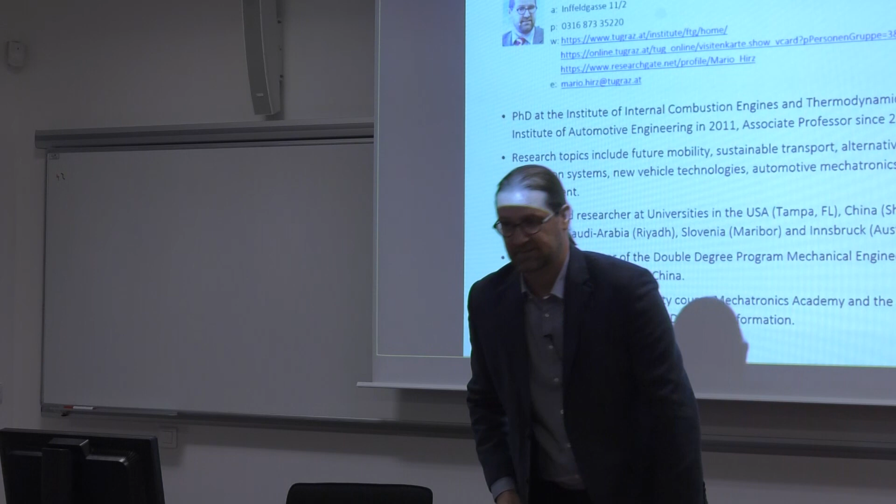So I'm Associate Professor at the Institute of Automotive Engineering at Graz University of Technology. I have a PhD in combustion engines, so I'm a mechanical engineer, and I come from the combustion engine side. After my PhD, I was asked to build up a new department, which we called automotive mechatronics, so it's electronics and electrics in cars. A large share of my research is related to electric mobility, electric drives, and I will come to that in more detail this evening.

Besides my job at the home university, Graz University of Technology, I'm a professor at Tongji University in Shanghai. We have a close cooperation with Tongji in Shanghai, and we also have a student exchange program. I worked for some time in the United States, in Tampa, at the university. This winter I'm in Thailand, in Bangkok, where we do a winter school. It's much warmer than here - in January we have 30 degrees in Thailand, so it's not a bad idea to make a winter school there. I'm well-networked internationally, because automotive industry and automotive research are also worldwide networked.

A few words about my university. I don't need to say much about Graz - Graz is in the south of Austria. We have about 300,000 people, a little less, so it's smaller than Brno. With the agglomeration, we have about 500,000. What's interesting in Graz is that we have 4 universities and about 55,000 to 60,000 students, so it's a very young, dynamic city. One of these 4 universities is my university, the Graz University of Technology.

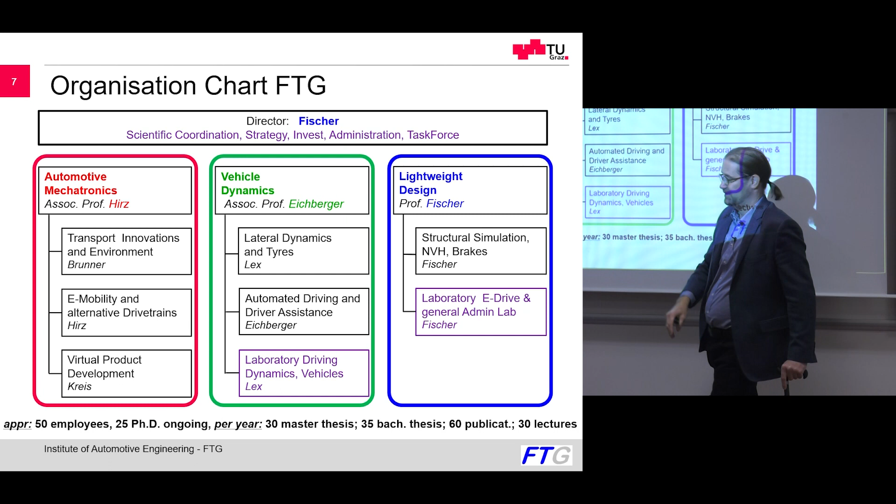The second department, led by my colleague Professor Eichberger, is related to vehicle dynamics, and he has two research groups: one led by my colleague Cornelia Lex about tire research, and Arno Eichberger, who is focused on driver assistance systems and automated driving.

In my group, I also work in the area of automated driving, but the difference is he considers humans in the car as drivers, and I work on robots. So the cars we develop in my group don't have a steering wheel or pedals anymore. Arno Eichberger is doing a lot of research in the interaction of humans and machines.

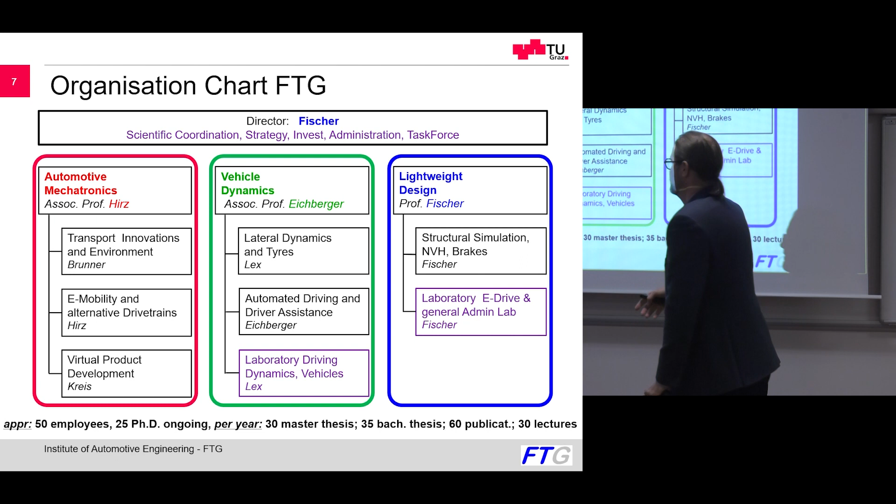Finally, my group is the largest group in the institute at this time. We have three research focuses, and I will introduce that in the next slide: transport innovation and environment, electric mobility, and virtual product development. For each of these groups I have one slide prepared to show you what we are working on.

Lectures and teaching - I think I don't have to talk a lot about this here in the university. We have basic lectures in automotive engineering, and specialization lectures. For example, I have a lecture on automotive mechatronics, innovative powertrains, commercial vehicle technology, measurement techniques, and so on. These are the specialization lectures in the area of automotive technology, plus laboratories and collaborative lectures, as is usual in the university.

Here I would like to start now with examples, and I want to show you what we are working on.

I just have a question - do you see something here behind the cameraman? Is this okay for you? Because I stand here to show you the screen, and if you don't see, just move, we have space enough here. Okay, or you sleep very well behind the cameraman.

This is another opportunity. Okay, the first group, transport, innovation, and environment, is related to technologies of the future. Here we think about technologies in 5 years, 10 years, or beyond. Students love this group because it's very innovative and creative.

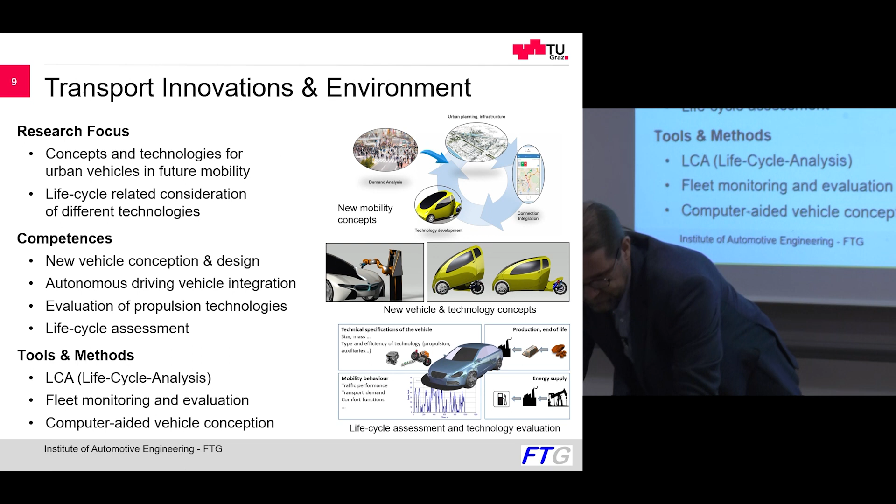We have shown it last year in Munich at the automotive fair, IAA, in a use case. I have prepared some videos just to show you what we are doing here. Give me a second, I'll change the screen.

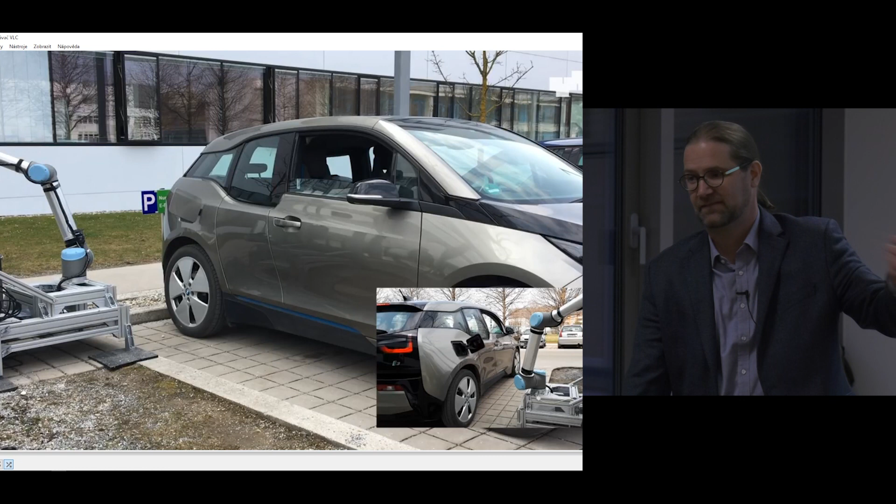So this was the first stage. Here you just see our robot and the car parking in. This car was not autonomously parking - we used a student for that because we did not get an autonomously parking car from BMW. Then the robotic system identifies the car with video-based object recognition, identifies the position of the charging lid, and then plugs in.

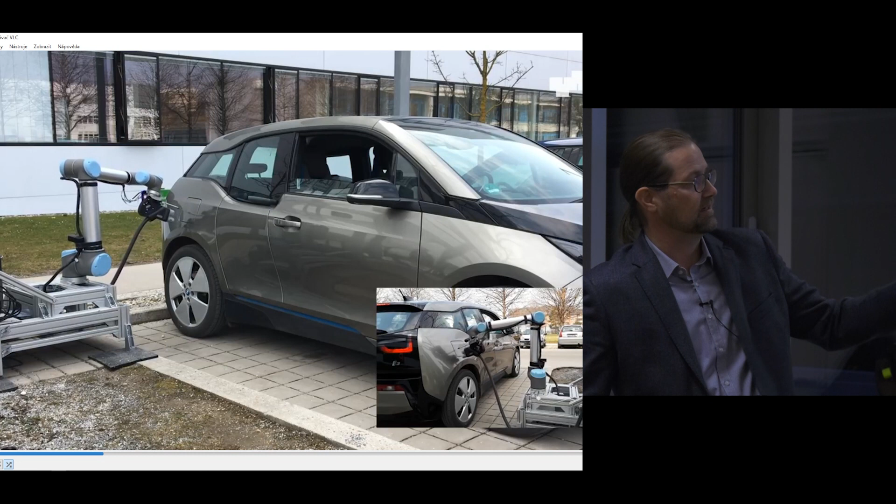This is a highly precise process because these standard plugs are not built for robotic manipulation. We do it by hand, and as a human doing it by hand, we can manage it somehow, but with the robot we must be very exact when placing that - it's about a tenth of a millimeter. This was one of the tasks one of my PhD students worked on. After charging is finished, it unplugs, closes the lid, and the car can exit the parking space. As I said, this was shown last year at a fair in Munich as a larger development step.

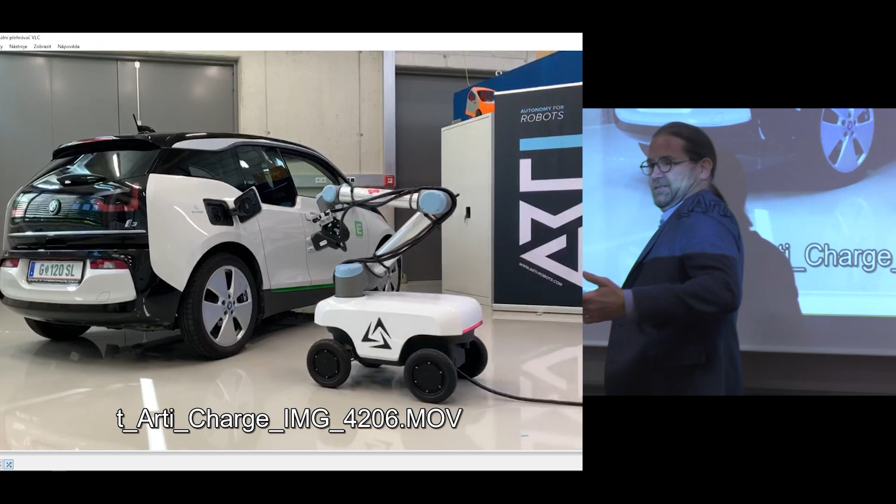Another project related to this: a robot that drives to the car where the car does not need to go to the robot. So the robot drives to the car, plugs in, and charges it.

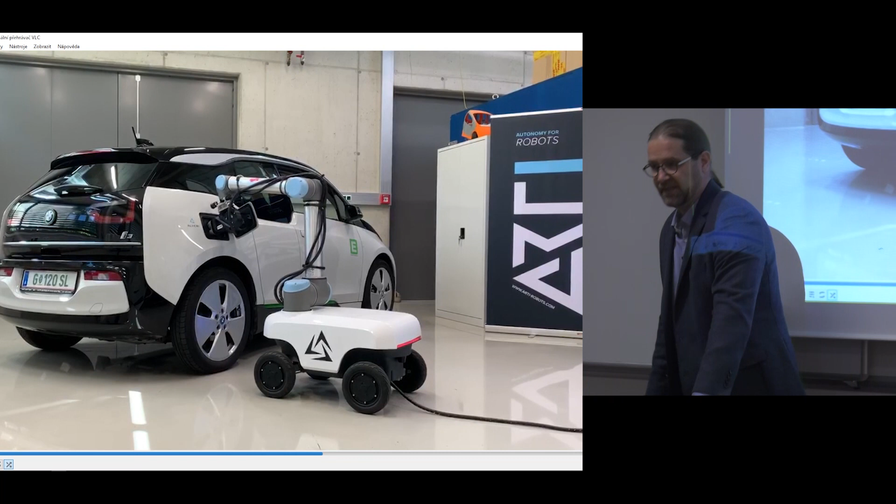This is just an early prototype because the challenge is how to bring the electricity to the robot. Here we did it with a cable, a small cable, so it was not high power charging. If you have a heavy cable, this is of course much more tricky.

On the next step, not shown on this video, we realized the robot takes a plug that is in a wall box at a parking place, plugs in, then drives to the next car and takes the plug. The challenge here is that you need space. When the cars park very tight, the robot cannot really go in. So I'm not so convinced it will really succeed, though it's a nice exercise.

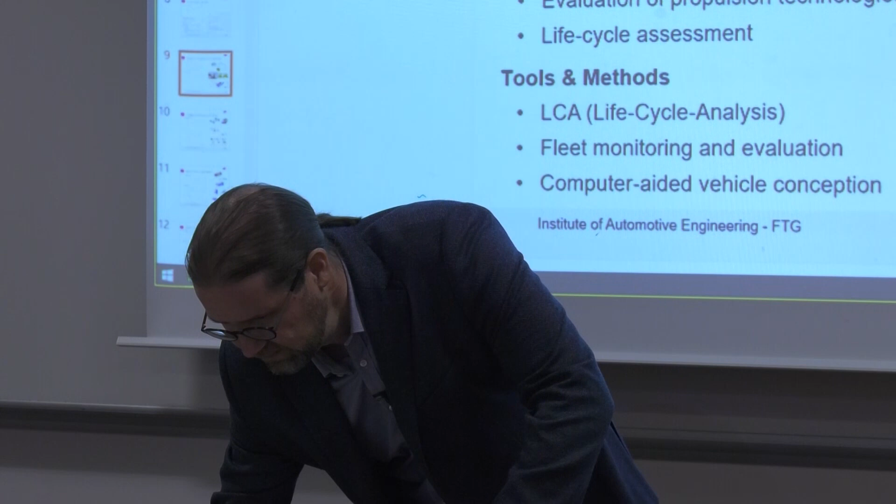My next research group is e-mobility and alternative drivetrains. Here we develop operating strategies for hybrid cars, for energy optimization. We had a project with BMW, for example.

Another large area where we have two PhD students working is the optimization of electric drive axles. These consist of an electric motor, inverter, and a gearbox that is typically not shiftable—most cars have not shiftable gearboxes. This drive axle should be optimized in terms of performance, efficiency, space requirements so it fits into the car, and of course costs. Cost is a big issue here.

We developed, together with a large international supplier, Magna—perhaps you have heard of Magna Powertrain—a new generation of drive axles, and I also have a video. It's a little bit of an advertising video, so I'll skip the beginning, but just to show you what we are doing here.

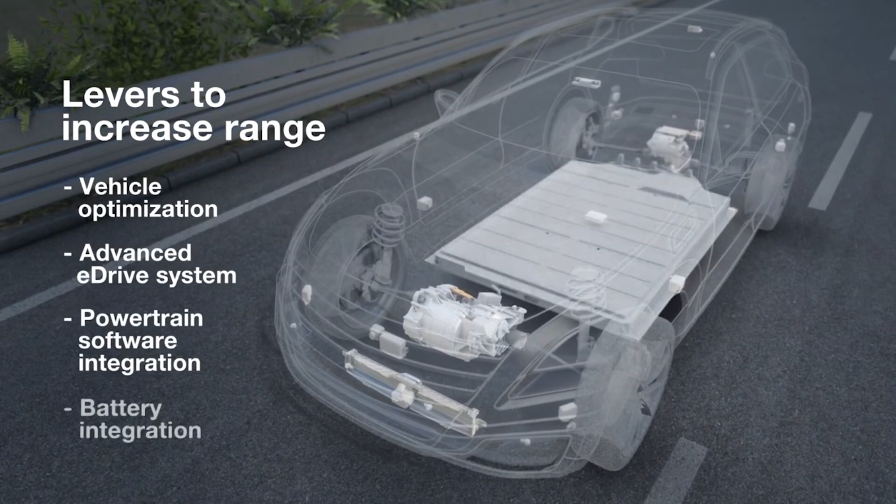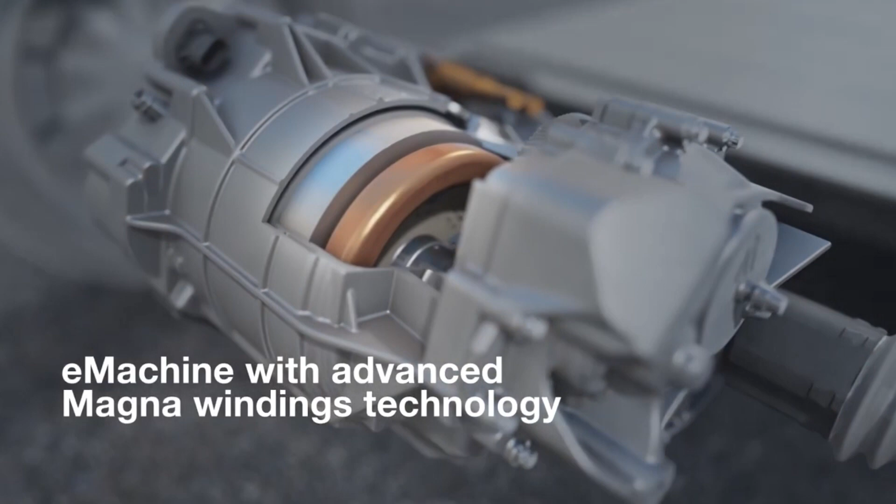I shifted past the first advertising part. A little bit later, you see these drive axles can be used in the front axle and rear axle, and they have to be very compact. The space demands are very small, a very compact design to have space for luggage and enable efficient vehicle packaging. Here we developed numeric optimization methods using Pareto optimal solutions.

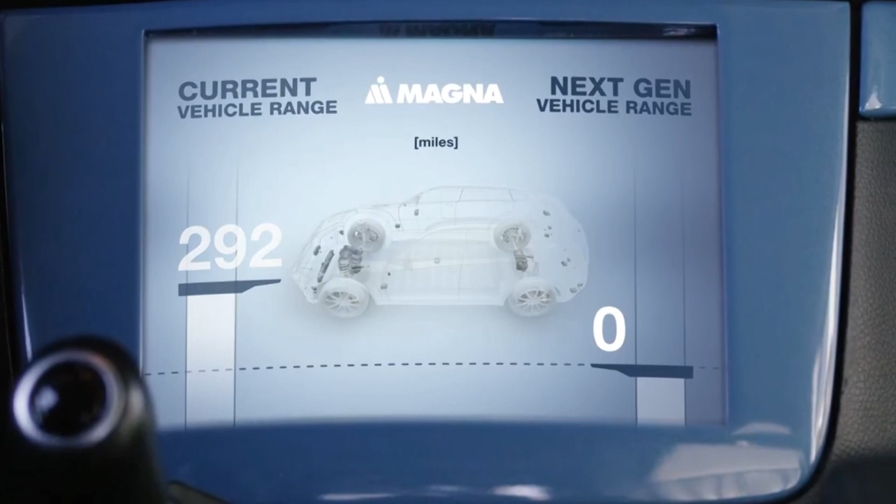So we have multi-dimensional optimization, typically between 20 and 50 parameters, reaching a complexity we cannot really display with our typically used diagrams or measures. So we developed a higher dimensional optimization algorithm that handles this large number of parameters. Yeah, as I said, it's advertising—there the sun is always shining and the grass is green.

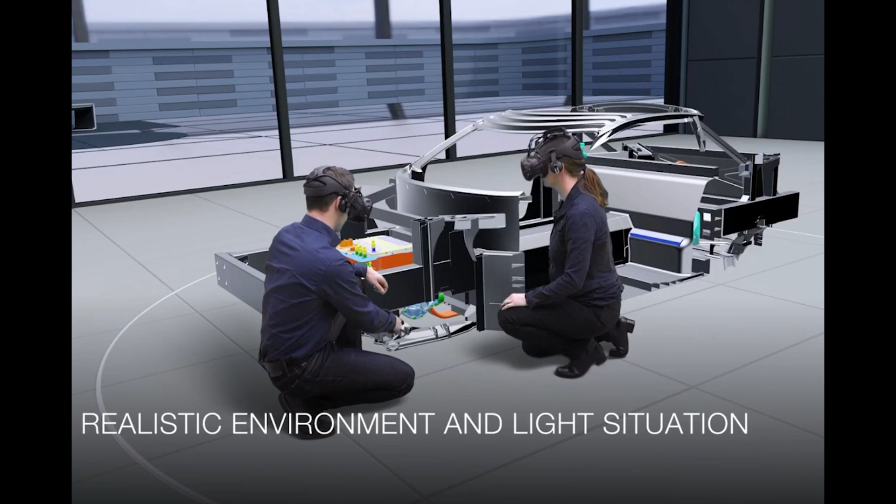This is one of my PhD students here. The tricky thing was to combine the real human and the virtual environment. As you see, this engineer is making section cuts through the vehicle layout, evaluating design; ergonomic studies are also done here, accessibility, and all that stuff related to packaging and ergonomics layout.

The next group is not mine—this is a colleague of mine in another department, Cornelia Lex. She's working on tire research. This is an interesting topic: you could imagine tires we have had for more than 100 years, and they work very well, so rubber tires are perfect. So what is the need for research or developing new methods?

Cornelia is working on tire friction estimation in real time. The friction between tire and road is a very important parameter for control systems, like electronic stability control, anti-lock braking system, and others, and even more important for automated driving functions or driver assistance functions. The system should know the friction between tire and road to react correctly in real time. For example, when you drive and it's slippery, perhaps it snowed overnight and you drive on a snowy or icy spot, the system has to be informed in real time so that in case there is a braking event or you are cornering, it reacts the right way. My colleague does a lot of simulation and measurement in this field.

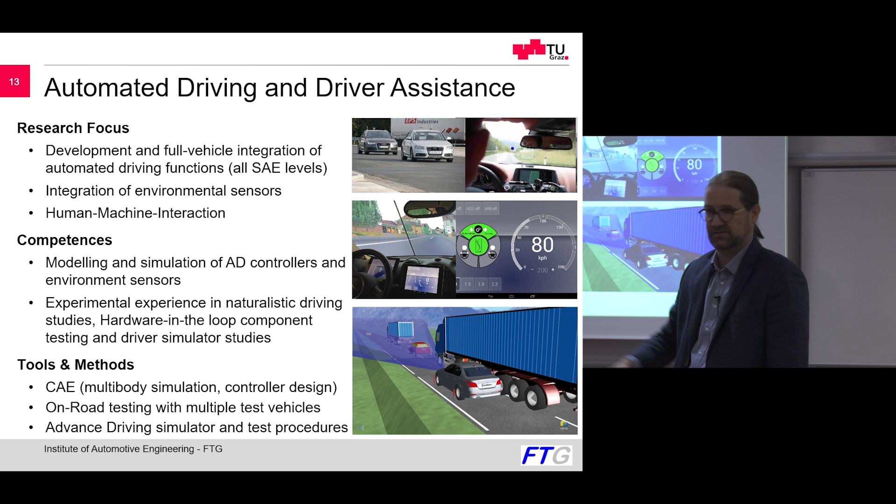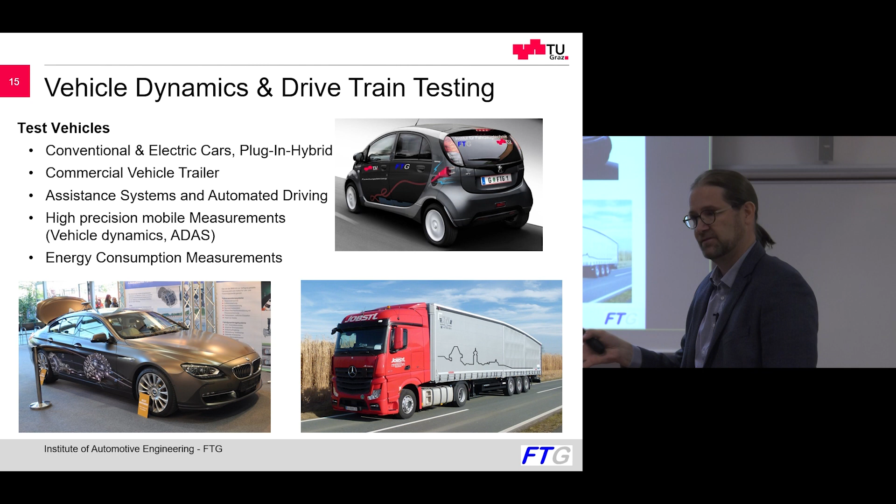Besides that, we have research vehicles and do a lot of measurement on the road. With small cars, like this small electric car, or a BMW with driver assistance functions, and also in the truck industry, heavy commercial vehicle industry, we have continuous research projects.

Here we do sensor measurements, investigation of laser-based sensors, LiDAR sensors, camera sensors, radar sensors. I showed some examples yesterday in the lecture.

We also have hardware test benches here, a brake test bench for measuring brake vibrations and noise, but also the capability and performance of the brake. And here's a tire test bench.

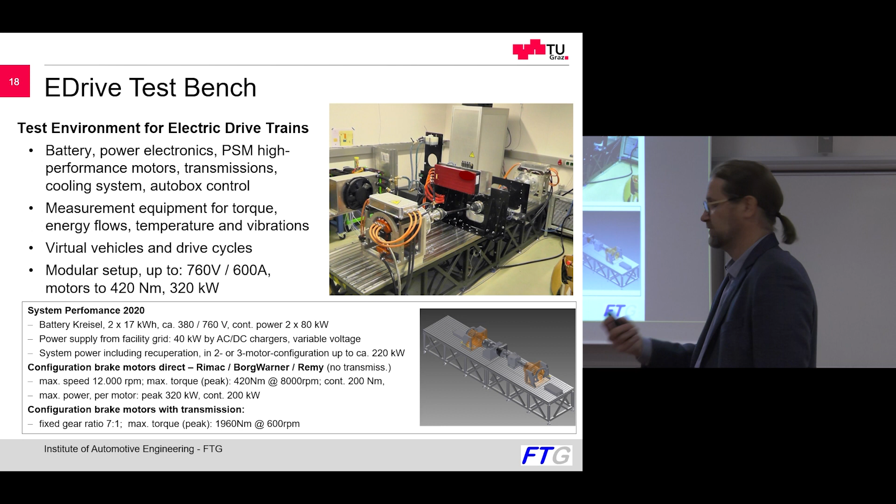Then some powertrain test benches for electric drives, for example. We have a battery simulator, equipment that we need for powertrain development. Also some sensor test benches - this is an example of a high accurate test bench for position sensors of electric motors. You are electrical engineers here, so you know we need very exact position detection of electric motors to control asynchronous or synchronous motors. For both, we need these sensors with very high accuracy and efficiency. What we do here is improve these sensors - we measure them, work with sensor companies, and improve them.

Finally, of course, we have student teams. I had the opportunity yesterday to visit the Formula SAE team, and to have a talk with them. In my university we also have student teams, and we have this Formula SAE team.

Formula SAE, this is racing, very interesting here, they shifted all to electrics, to electric drives. We had this discussion yesterday as well.

This year was the first year where they built an electric-driven racing car, and it's faster than those with the combustion engine. We experienced that over the past years, and most teams shifted to electric. It is faster because with electric drives we have more opportunity for torque vectoring. This is very cool — the best teams have all-wheel drive, front and rear, with one motor for each wheel.

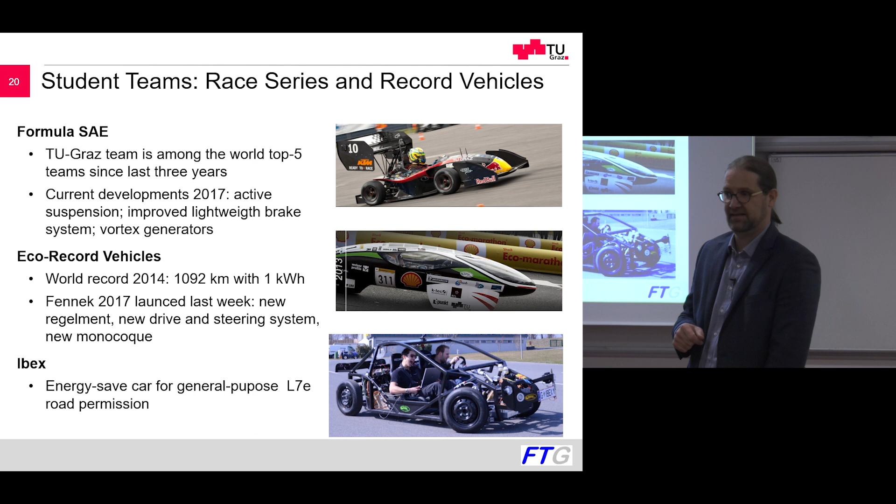My topic of the colloquium series presentation today has the name: Transition of Propulsion Technologies on the Way to Carbon Neutral Mobility — as a challenge or opportunity, how we can improve the technology for the future, and motivation for the construction, for the engineering, for the research, and maybe for you as a student to accelerate your studies.

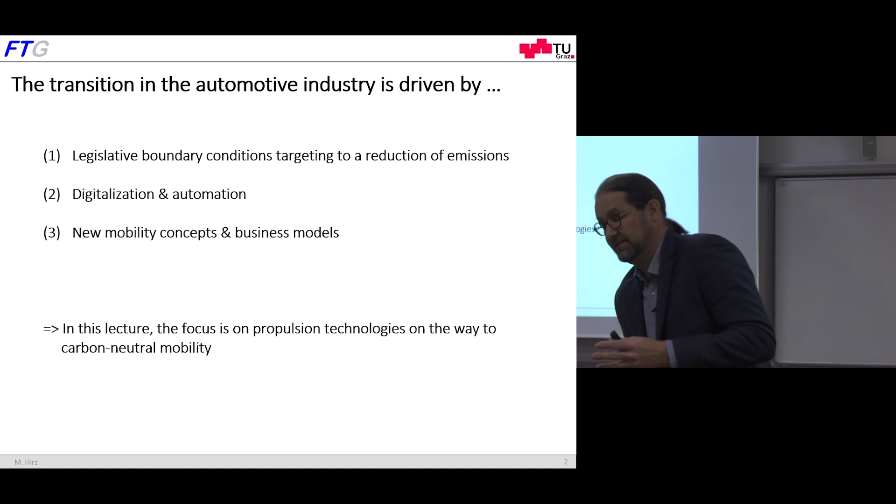I just read a publication from the German community of car manufacturers, VDA, Verband der Automobilindustrie, two days ago, where they announced that the number of sold cars per year will not reach the level it was in 2018. In 2018 we had nearly 100 million cars sold worldwide, some kind of peak. Due to the Corona crisis and other crises, we are now at about 60 to 65 million, a considerable decrease. Of course it will increase again, but the publication mentioned we will not reach 100 million anymore, and car manufacturers have to react to that.

That's the reason why car manufacturers also invest in new mobility concepts and take part to learn how to handle this new area of transportation, of people mobility. It's a very exciting topic, but I will not go into detail, because then we would stay here all night with my presentation. I have about two hours, so I will focus on propulsion systems, which is one very important aspect in the transition of the automotive industry today.

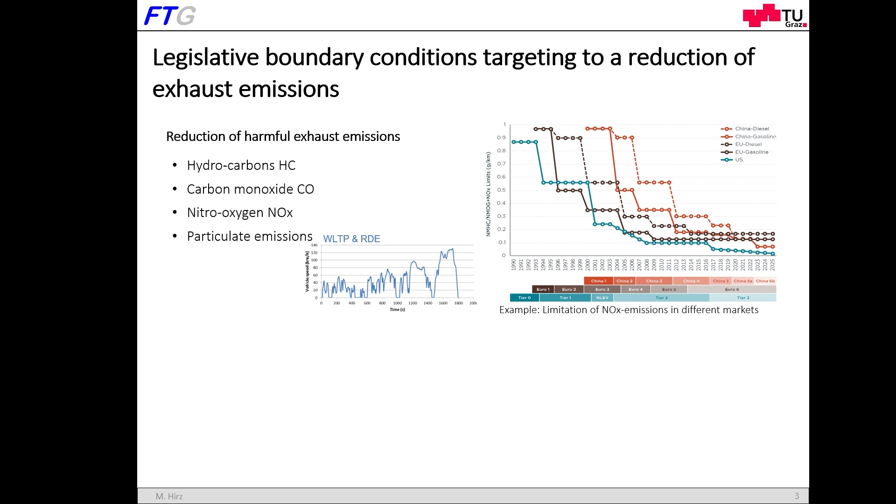What are the drivers of this change of propulsion systems to electric? Mainly the legislative boundary conditions. When we look at legislation, there are two types influencing this transition: the reduction of harmful exhaust emissions, and the reduction of CO2 emissions. I keep these separated because they address different challenges, different aspects.

The reduction of harmful exhaust emissions relates to the harm of exhaust gases to the health of people and the environment, but not directly to climate change. To give you an idea, when we look at the exhaust emission of a modern car, less than 1% of the exhaust is harmful emissions. So it's a very small amount, but it's poisonous, and therefore it's restricted for sure.

This reduction of harmful exhaust emission is very strictly regulated. I have an example here - I know you cannot see it from the last rows, but it's just to give an estimation. Here is the timeline and the emission limit, and we see it's reduced. Over the past decades it's reduced a lot. The different colors indicate different markets: blue is United States, which has the toughest NOx legislation for nitrogen oxides. Red is Chinese, brown is European. We see they are all decreasing.

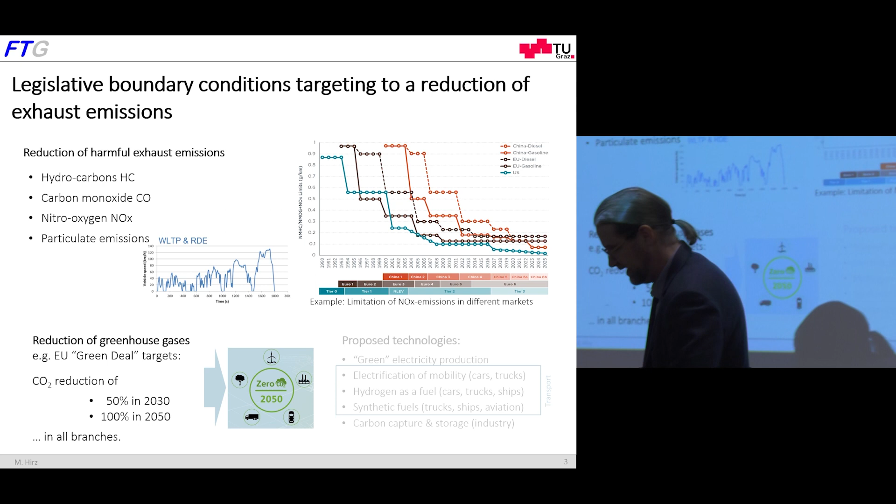So I have to care. And when we look at this behavior of CO2 emissions, it's related to 1990. So the baseline is 1990, and the target is in 2030 to be below 50% of that.

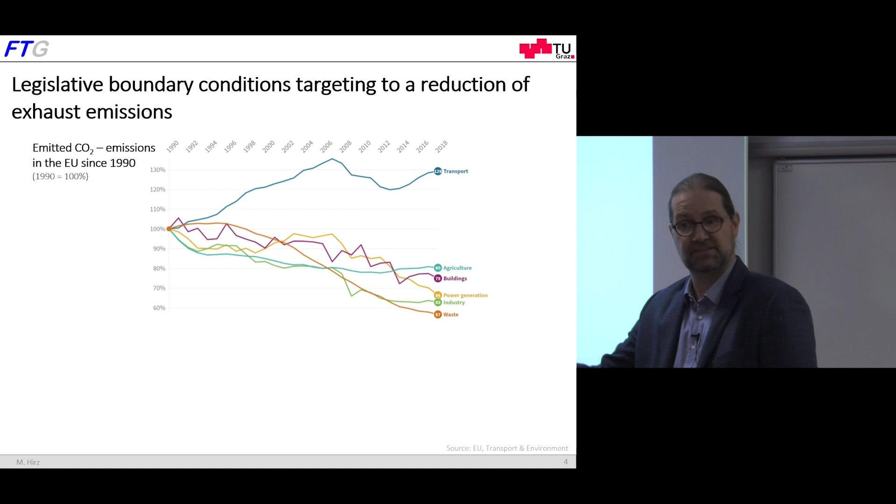The European Commission not only announces the targets, it also announces technologies that should be used to reach that target. For the transportation sector, there is written down electrification of cars and trucks - a clear strategy. Then we have hydrogen as a fuel, though the application is not so clearly defined. It might be for trucks, ships, aviation, we can discuss, but hydrogen as a storage element for fuel is announced here. I'll come to that later in more detail.

The third one is the use of synthetic fuels. Synthetic fuels are carbon neutral fuels. I'll show you in a few minutes how it works, where we can operate a system with theoretically zero carbon or low carbon footprint. This is related to transportation.

Besides that, the European Commission supports green electricity production. Whatever green is, we can discuss this, or it is discussed. With the latest announcement, nuclear power and natural gas is seen as green. I will not go into detail here too much, but it is seen in politics.

Another relevant aspect is carbon capture and storage. For the industry mainly, we have processes that demand very much heat, for steel production for example. The idea is that for these high demanding, high CO2 producing processes, we take the CO2, capture it, and store it in deep drilled holes or whatever in the earth's crust, however we can store that - to reduce the output of CO2.

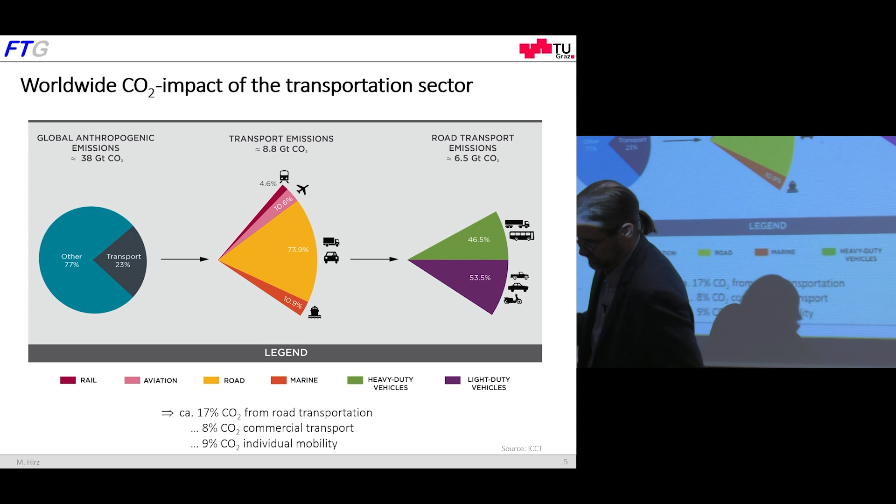When we look at road transport, we have a little bit more than half caused by cars and small vehicles, and a little bit less than half by heavy-duty vehicles. So in total, when we multiply the 74% by the 23%, we have about 17% of the CO2 impact stemming from transportation. So it is a relevant factor - in Europe it's a little bit higher because we have a higher share of transportation.

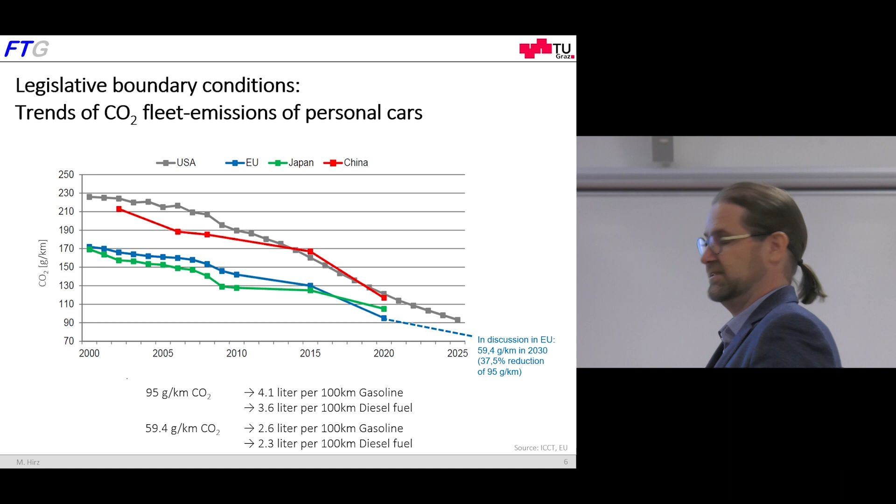Okay, what are the consequences? This 95 grams per kilometer, if not reached by the car manufacturer, is punished - with 95 euro per gram violation per car sold.

Just to play a little bit with numbers to give you an idea how expensive this is for the car manufacturer, let's take Volkswagen. Volkswagen Group sells about 3 million cars a year in Europe - all the Volkswagen brands. So we have about 3 million cars. For the example of Volkswagen: 3 million cars multiplied with 95 euro.

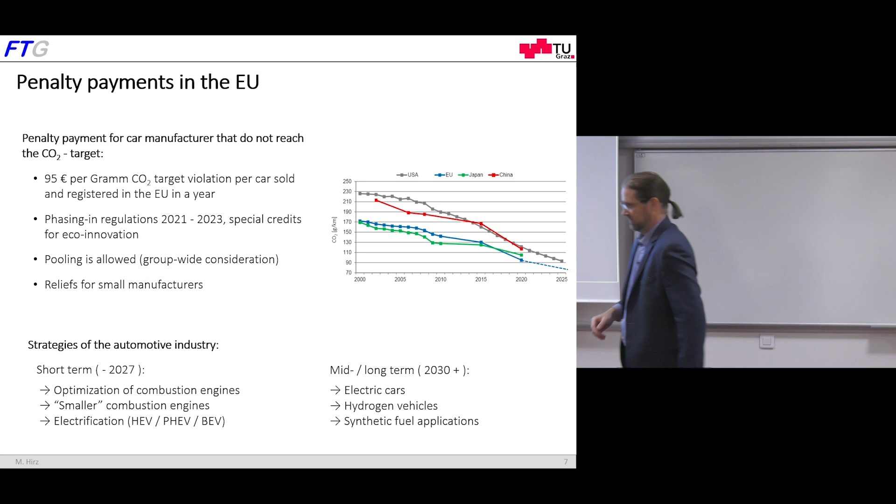Let's look into the propulsion technologies. In this next section, I'd like to compare combustion engines, electric drives, and hybrids. Before I do that, some physics - don't be afraid, stay in the room, it doesn't hurt, it's just for explanation. I want to point out the very important aspect we have with electric drives in terms of recuperation.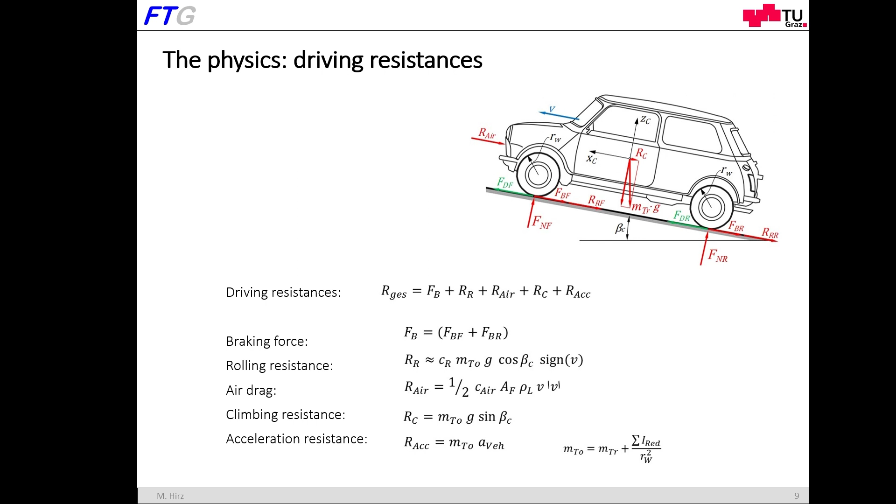When we look at the driving resistances, roughly we have the rolling resistance, the air resistance, the climbing resistance, and the acceleration resistance. In a driving situation - for example, driving uphill and accelerating - we see the rolling resistance is relatively small over speed. The air drag increases with a power of 3, a cubic function, with driving speed. Then we have the inclination and acceleration, for example when we drive uphill and overtake a truck.

When we look at the power we have to put into the car for this driving situation, we have the possibility to recover acceleration and inclination energy by braking. We can do this with two types: for inclination, we can do it with all cars, because when we go uphill and later downhill, we get some benefit. For acceleration, we can only do it during braking.

With a conventional car with a combustion engine, what happens to this energy we've put in when we brake? It's converted to heat - yes, absolutely right. So we heat up the environment, which is perhaps also not so good for global warming, but the impact is small. Anyway, the energy is gone, we cannot recover it.

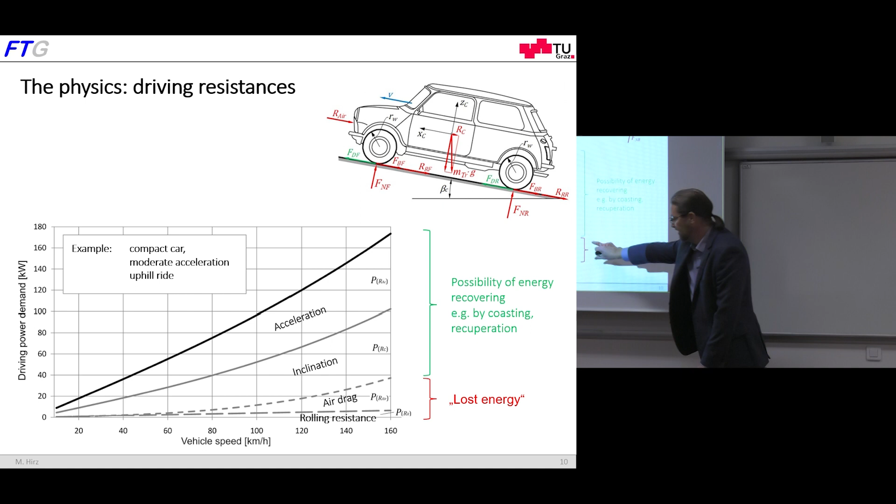The air drag and rolling resistance are lost - we cannot recover them. But even though they're relatively small, this points to the importance of improving aerodynamics and rolling resistance of the car, because it influences energy consumption during driving, and ultimately the driving range, for example with an electric car.

Conventional drives with combustion engines are cheap, established, and give us long driving distances. It works very well. On the weakness side, we have a thermodynamically limited efficiency.

What does it mean? The combustion process is based on the so-called Carnot process, which defines the theoretical efficiency that could be achieved by a combustion engine. This Carnot process is very simplified. It's defined by the upper temperature and lower temperature in the combustion chamber, and these temperatures are limited.

The lower temperature is more or less the ambient temperature where we aspirate the air. The upper temperature is limited by materials, because when it gets too hot, the piston melts. This upper temperature is the combustion temperature, not the wall temperature — in combustion it's about 2,200 to 2,400 Kelvin, perhaps a little higher, but it's limited. Due to this limitation, the theoretical optimal combustion engine cannot reach a better efficiency than 70–75%.

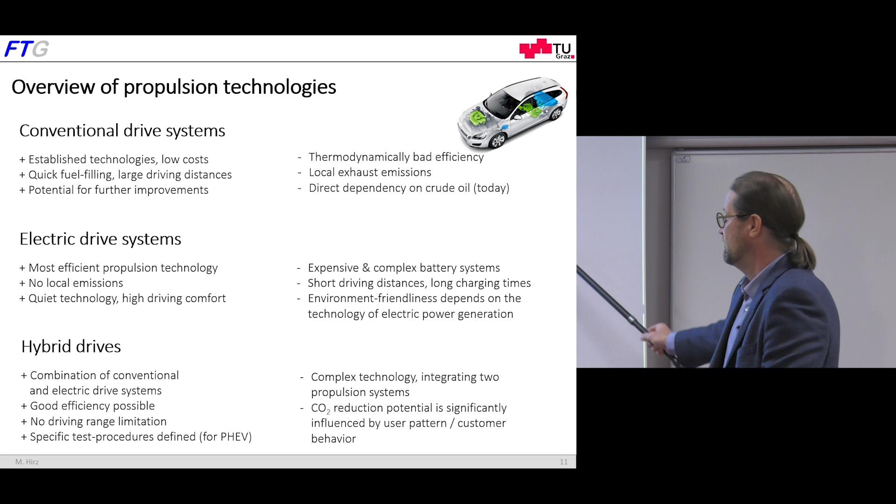And as a very important point, which I'll come to later, the environmental friendliness depends on the technology of electric power generation. When we produce electric power from water, it's fine. When we do it with coal plants, it's not so good. I have some slides about that.

Hybrid drives are the third one. Hybrid drive is the transition technology. I assume that in the next years, car manufacturers will introduce new cars only with combustion engines in combination with hybrids, because hybrids can improve efficiency and reduce fuel consumption. In that way, hybrids will be very significant in the automotive industry for the next 5 to 6 years, but then their share will decrease because we have the zero combustion engine target for 2035. So for the next years, hybrids for sure are very relevant.

Drawbacks of hybrids are that it's complex. We have to integrate electric drive and combustion engines, and the potential to reduce fuel consumption is very much related to the technology of the hybrid. So some cars are mild hybrids, where the largest effect is just to write down that it's a hybrid, for sales purposes.

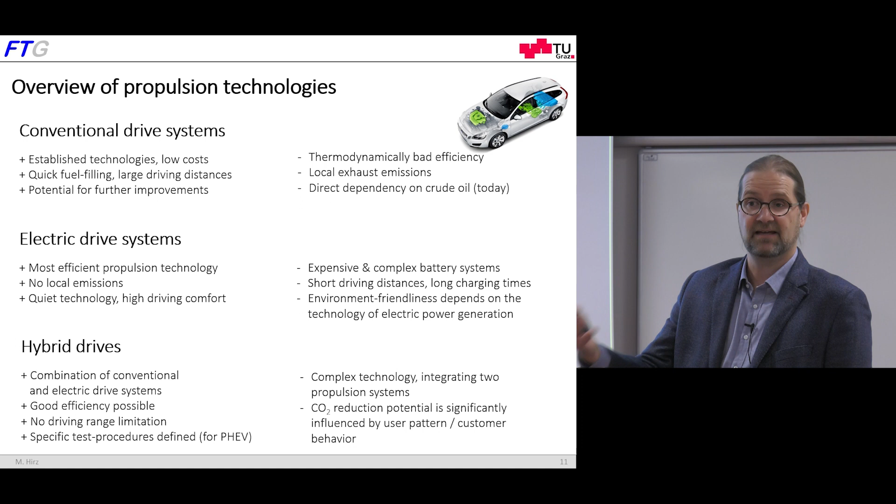It's not really a big effect on fuel consumption reduction. Other cars are full hybrids, Toyota Prius for example, or others, which can reach 20-25% fuel consumption reduction. And others are plug-in hybrids, where we have the possibility to charge the battery on the grid. I'll come to that later. Yeah, here I have it on this slide.

So hybrid technologies are available in very different configurations. I don't have time today to go into detail, but depending on how the combustion engine and the electric motors are arranged, we distinguish between serial hybrid, parallel hybrid, and combined or power split hybrids. And all of them have different strengths and weaknesses in their applications.

As I said, with CO2 reduction potential, perhaps 5% with a mild hybrid, up to 50% with a plug-in hybrid, but it depends on how the customer uses the car.

A friend of mine is working at BMW Fleet Management, so he's responsible for these business cars of BMW. And he told me, last time we were having a beer in a bar, I asked him about the plug-in hybrids. And he told me, yeah, they have very good plug-in hybrids at BMW, the 5 Series for example. They are very good business cars. But when they come back from the fleet after 3 years or so, they are replaced, and in more than 80% of cases, the charging cable is still originally packed in the rear trunk. That means this plug-in hybrid was never charged.

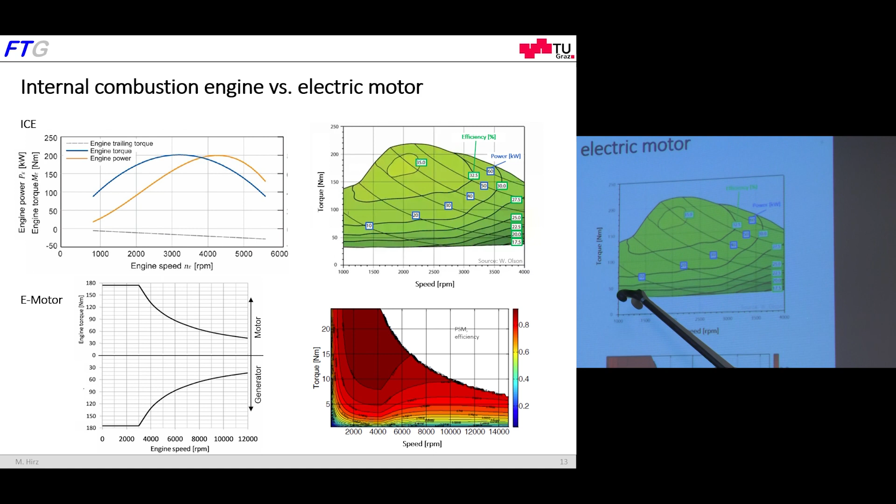Regarding efficiency, we see here the diagrams of a combustion engine, where in this example we have the best efficiency here in this small area, 35%. And with part load, the efficiency goes down to 20%, whatever. So in the area where we operate the car most of the time, we do not have the best efficiency.

But don't tell this to the police when you drive too fast next time. Don't argue that you just want to operate the car in a good efficiency area. I think it will not work.

But anyway, for our daily usage, we don't operate the combustion engine in a good efficiency area. With the electric motor, it's totally different. We have 80-90% efficiency over a very wide range of the electric motor. I think you know that. Only at very part load do we have some issues. We have differences depending on the electric motor type, but in general the efficiency is another world, another dimension here.

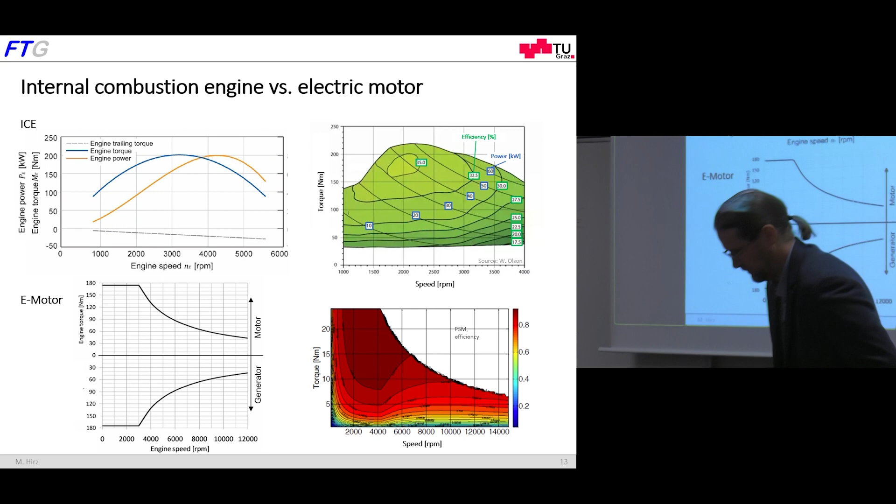I always press the wrong direction.

With the electric car, the powertrain is much more simple under mechanical boundary conditions. We have the battery, the electric motor and inverter, a high voltage system, charging system—that's it. So much less components, but not cheaper, because especially the battery is very expensive. I have a cost comparison on the next slide.

What does it mean when the car industry now changes from combustion engine to electric? It means that a lot of supplier companies lose their jobs. And this is a serious issue, much discussed this time: how we can support the European supplier industry to go with this transition to electric. We have very good companies and much knowledge in Europe to produce combustion engines and gearboxes and all the components. But when we go to electric drive, this knowledge is fine, but it does not help to earn money. And so we must support the companies to make this step from combustion engine to electric drive.

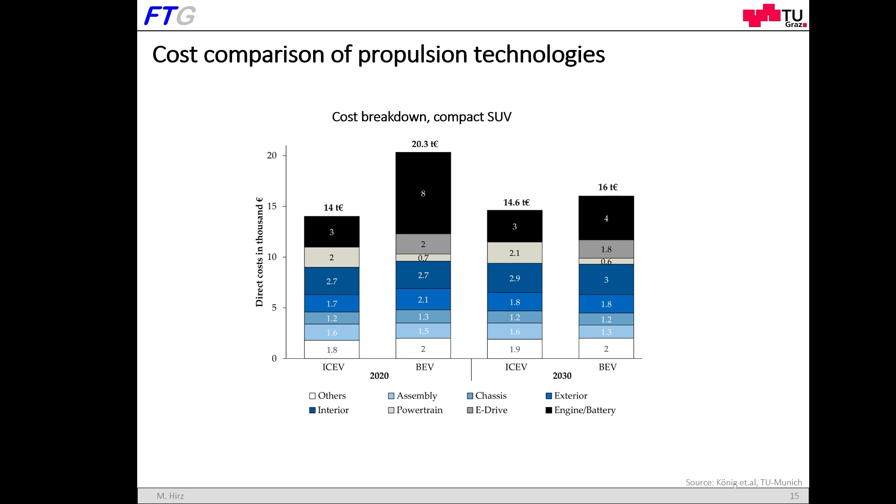Let's talk about the impact of propulsion technologies, and here I will highlight the CO2 impact, the climate warming effect. When we analyze cars, we have to consider what happens in the car plus what happens before the car, before we go into the car, with the energy provision.

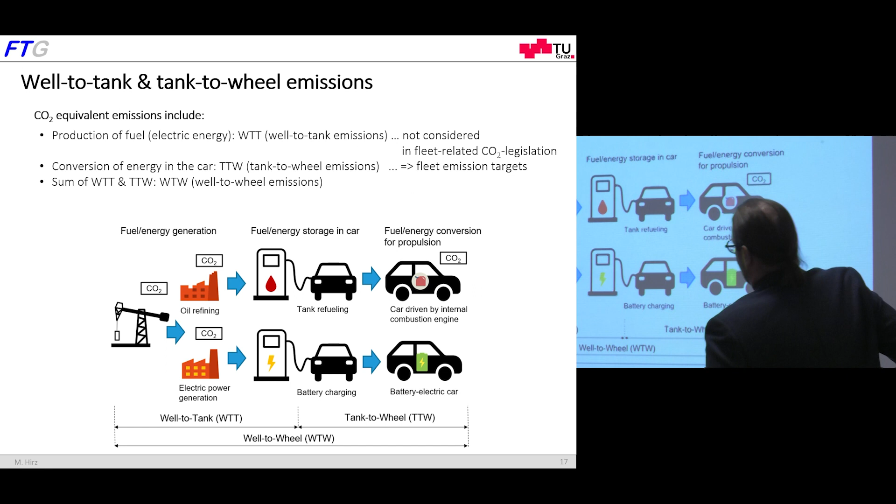For the car with combustion engine, we have here the production of fuel: crude oil production, oil refining, transport to the gas station. At the gas station, we fill in the petrol or diesel into the car, and then we drive the car. The tank-to-wheel emissions are at the exhaust, and they are directly proportional to the fuel consumption.

The well-to-tank emissions are in the range of about 10 to 20% of the tank-to-wheel emissions. So when a car, for example, has about 100 grams per kilometer CO2 during driving, about 10 to 20% needs to be added to represent the production of fuel. It's in this wide range because it differs between diesel and gasoline, and also between the processes applied.

For the electric car, we don't have CO2 emissions in the car. An electric car has no exhaust, but we have the provision of electricity. So it plays a big role how electricity is produced, and here I have prepared a slide. Let me see, here it is.

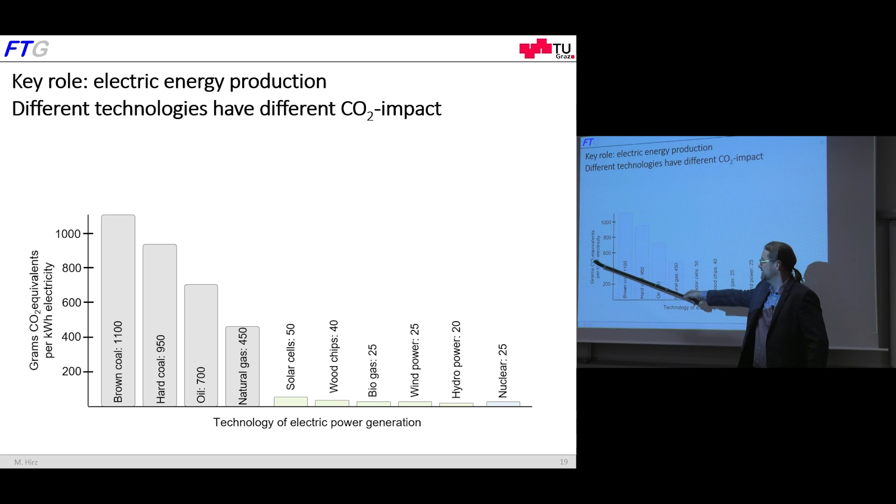Different technologies of electricity production. I have here the different technologies of electricity production and the CO2 impact in grams CO2 per kilowatt hour electricity produced. I've written down here CO2 equivalents. This is a typical term we use in life cycle analysis where we convert different values into a CO2 impact. For example, when methane is generated, we convert the impact of methane into a CO2 value, so we convert into one parameter because it's easier to represent. And when we look at that, we see that...

Fossil-based power generation has a high CO2 impact, of course, because we burn hydrocarbons, and when we burn hydrocarbons we produce CO2. So brown coal has more than 1,000, hard coal about 1,000 grams per kilowatt hour. Oil and natural gas are not so bad, about half of the coal power plant. Then we have a row of so-called renewable technologies: solar cells, wood chips, biogas, wind, hydropower, and they are in the range of 20 to 50 grams per kilowatt hour.

It's a completely different system to produce electricity. What's included here is also the production of the power plant, the service of the power plant. That's the reason why hydropower still has 20, solar power has 50 because the production of the solar cells needs a higher effort. Nuclear fuel is rather good in terms of CO2, but not considered here are the high costs of nuclear power plants, the deposition of nuclear waste, or the risk of nuclear accidents. It's not included here, I just focus on the CO2, and here we see that nuclear power has a pretty good impact.

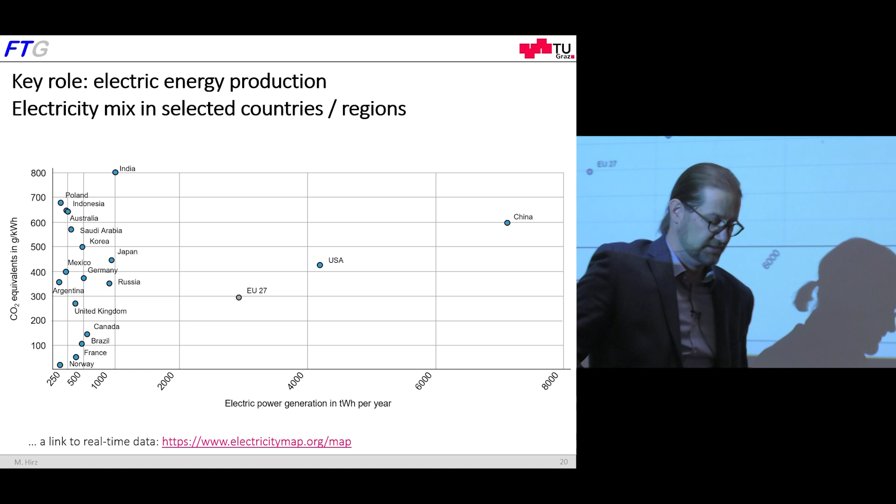And when we look at this electricity production in different countries, we see very, very different behavior. This diagram shows the mix of CO2 impact, the so-called electricity mix, in CO2 in grams per kilowatt hour, in average over a year.

So this is not for a specific time, it's averaged over a year. It shows the impact in terms of amount of electric power generation in terawatt hours per year. Here we see the large markets or large countries. China has about 7,000 terawatt hours electricity production a year, the United States a little bit more than 4,000, and the Europeans, EU-27, about 3,000 terawatt hours a year.

We also see China has on average about 600 grams per kilowatt hour, the United States about 400, and the EU about 300. I have added some more countries in detail.

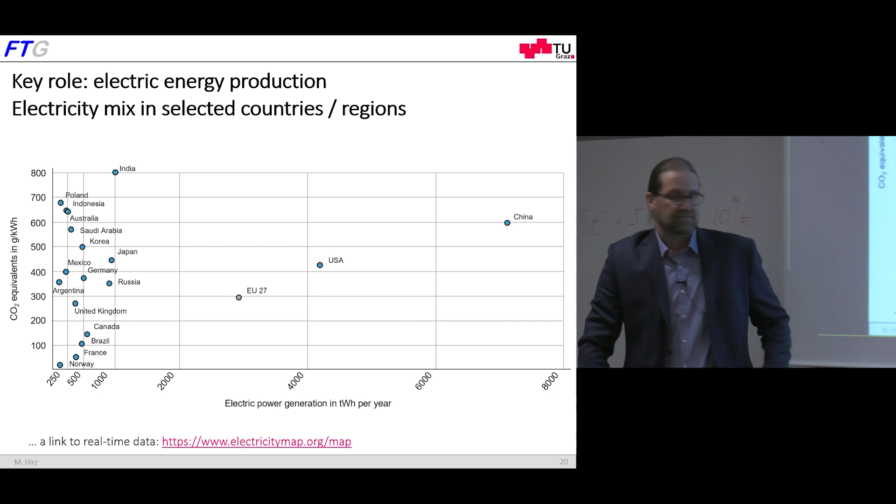Norway is the blueprint of green electricity production. They have mainly hydropower, so very low emissions. France has a large share of nuclear power, I think 75% or something like that. Canada also has a large share of nuclear power. Brazil has water power and some other countries. Germany is at about 400. I just have here the largest countries.

By the way, if you want to know the electricity mix of your country, I have a link here. Let's look at Czech Republic. This electricity map just shows in real time the CO2 footprint. When I look at this, I have about 500 grams per kilowatt hour in Czech Republic today. This is because of the weather, we have no sun, no wind. Let me see if it works.

460 is the average per year, I think. I just wanted to see it online in real time, but yeah, this is the reason. In Austria, we also have about 220 because we have much water power in Austria.

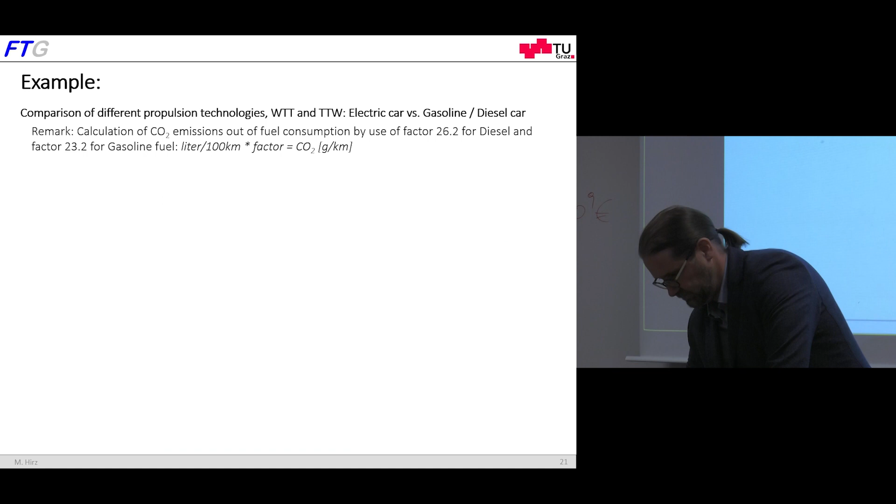And of course this now influences the CO2 impact of the electric car, depending on how electricity is produced. I will not calculate that here. On the next step, when we go more accurately into this analysis, we have to consider not only the driving of the car, but also the production of the car and the service of the car, so whatever appears in the life cycle. This I would like to show you on the next slide.

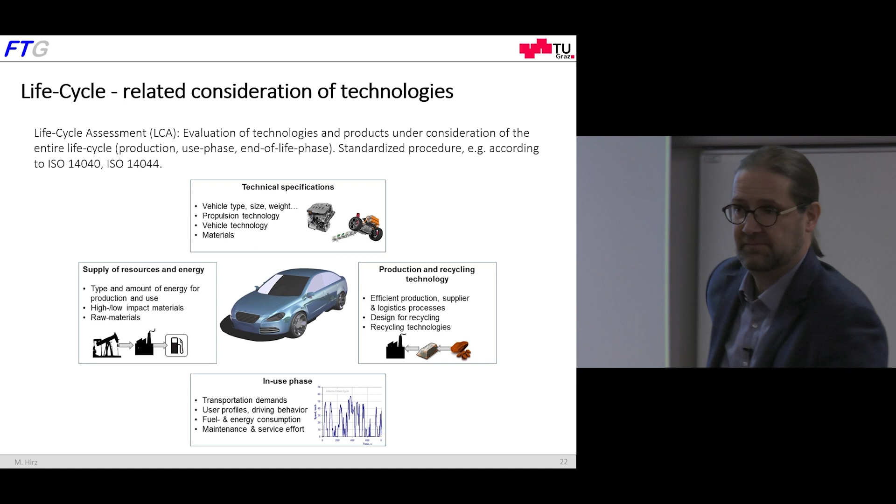So the so-called life cycle consideration, where we compare different technologies - here it is. This life cycle assessment includes the entire life cycle of the product. In case of a car, we have materials production, so extraction of raw materials, processing of materials, transportation. We have vehicle manufacturing, the components, the logistics, the parts in the car. We have the usage, where we learned about the well-to-tank and tank-to-wheel emissions. We have the driving mileage, the driving behavior, how the car is used. And we have the end of life with recycling and disassembling. When we consider all these processes, we can calculate a total CO2 footprint of a car.

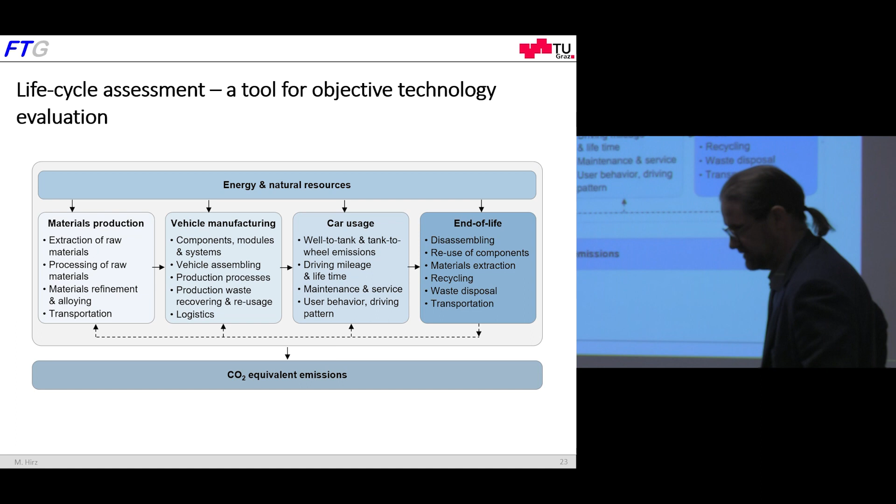And I have done this and want to show you some results. In a rough overview, we have done this for a number of cars.

On this slide I want to show you the general behavior of the different powertrain systems. I have set the CO2 equivalent impact with the car with combustion engine at 100%, divided into vehicle and powertrain for the production of the car. In relation to the car with combustion engine, the electric car has between 50 to 100% higher CO2 impact, mainly caused by the battery. The battery production and battery materials require very much effort, and due to the fact we have about the same CO2 footprint of the car including electric drive axles, this is provided by the battery. Of course it ranges depending on how large the battery is and which car equipment and car type we have, but the range is between 50 and 100% higher CO2 impact in production.

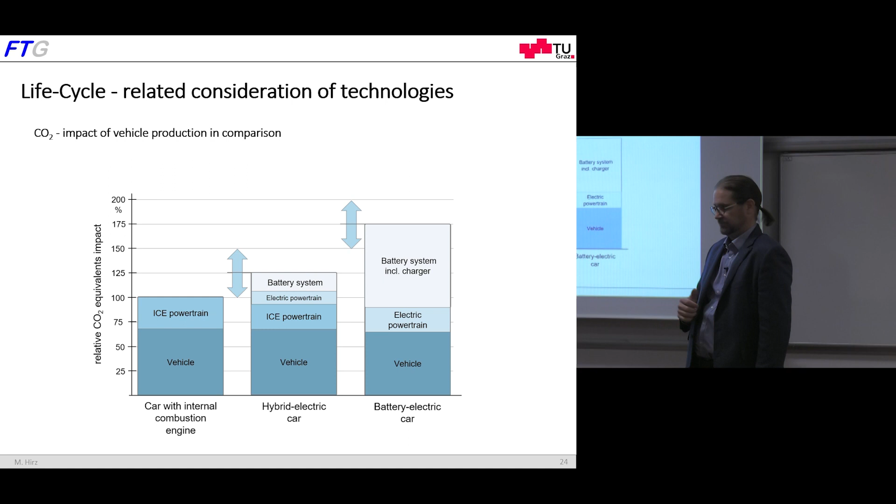The hybrid car is in between. If you have a mild hybrid, it's nearly the same as a standard car. When we have a plug-in hybrid, it can be up to 50% higher because modern plug-in hybrids have battery sizes of about 10 to 15 kilowatt hours, so it's a considerable battery, and this of course increases the CO2 impact of production. This is only the production - I will show you both production and use phase on one of the next slides.

I just want to show you here, we have done this calculation very accurately. In this example, for a Volkswagen ID.3, this electric car of Volkswagen, we have calculated the contributions of the different main modules in the car on the production-related CO2 footprint.

This is the version with 58 kilowatt hour battery, the large battery. Here we have 7 tons of CO2 in production, which is the CO2 from producing the battery. In total we have 14 tons, though it's not written down here. Half of that, 7 tons, is only the battery.

Then we have the bodywork of the car - a steel body, the electric powertrain, interior, and so on. Going one step further in detail, we analyze the different materials, where the battery cells are very relevant, along with steel, electrics, electronics, aluminum, and other components.

One point about the battery cells: an automotive high voltage battery, as used in an electric car, is typically a lithium-ion battery. It consists of a number of cells. There are different types of cells available, and these are combined into modules and then the battery pack. There's a cooling system for the battery, electronics control, a housing, and so on. In terms of value creation, about 40 to 60% of the cost of the battery is only the cells - the rest is everything else I mentioned.

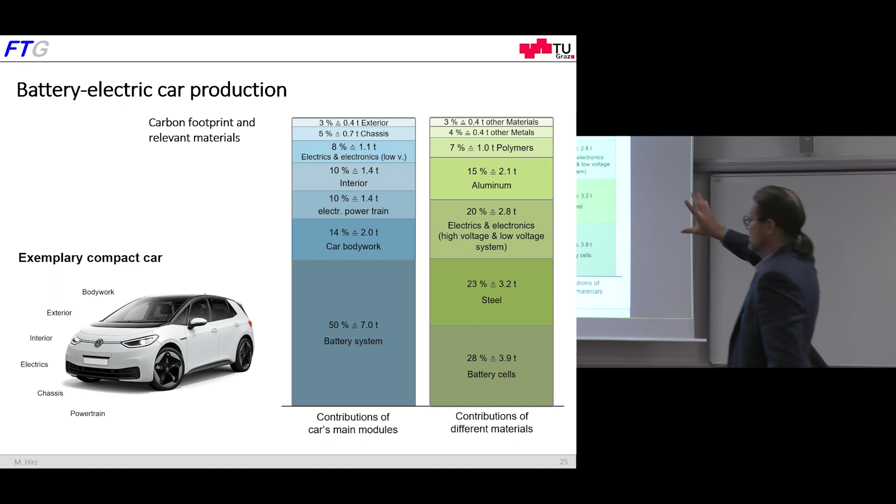Going back to CO2 emissions, this is the carbon footprint of the Volkswagen ID.3 for production, and this slide shows the energy demand for driving or usage of the car. I want to point out it's not only driving - for this car we assumed 16 kilowatt hours per 100 kilometers in a moderate driving style, a normal driving cycle. But we have to add auxiliaries, like the heating or cooling system, additional devices in the car, the lights, and so on - about 10% - plus the charging losses.

Regarding charging losses, they vary a lot depending on charging power. When we charge the car at home on the plug, we have very low charging power, perhaps 3 to 3.5 kilowatts, and the charging losses are very low because the battery isn't stressed. For low power charging, we have about 3% losses, perhaps 5%, not more. But when we charge on a supercharger with 100 kilowatts or more - Volkswagen doesn't allow more than 100 kilowatts for this car - but when we go to 200 kilowatts or higher, charging losses can go up to 25%.

We measured this on a Tesla Model 3 with maximum charging power of 250 kilowatts, and had charging losses of 25%. That means a quarter of the energy you put into the car is released as heat to the environment because we need to cool the battery. So regarding efficiency, charging power is an important parameter - I just wanted to mention that. Low power charging takes longer, but if you have time, choose low power charging - normally it's cheaper and the losses aren't as high.

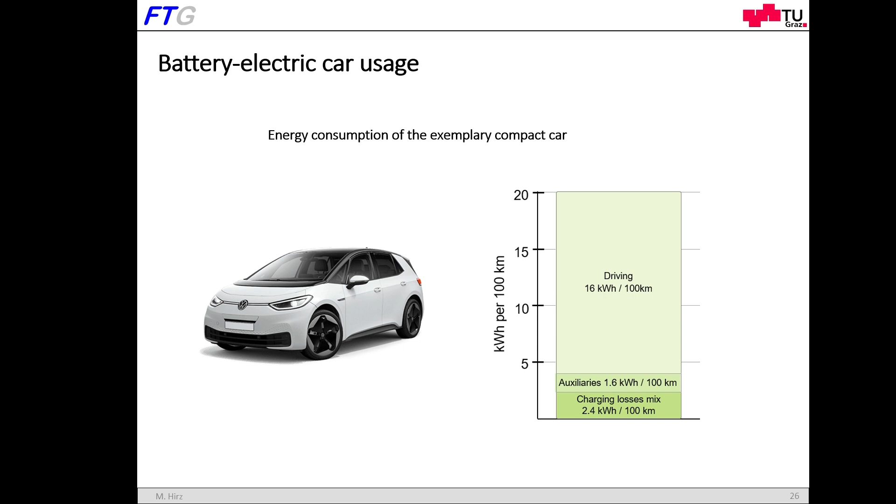In a simplified diagram, we see here the car with combustion engine, the internal combustion engine vehicle, ICEV. The production effort was 7 tons CO2. So to produce this BMW 1 Series, we have calculated 7 tons for the production.

Then over the driving distance, here we have assumed 200,000 kilometers, it's simplified because it's a straight line. In reality it's not accurately straight because we have service, spare parts, and so on, but they do not really influence that a lot. So at the end, after 200,000 kilometers, we have 40 tons CO2 produced. During the ride, we burn the fuel and produce CO2.

The Toyota Prius, as a hybrid car, has about 25% lower fuel consumption. That means it has a lower CO2 output during driving, but the effort for production is a little bit higher, about 20% higher. So the Prius has about 9 tons CO2 in production. But as you see, because of the lower fuel consumption, we have a break-even here below 50,000 kilometers in terms of CO2.

What about electric cars? Here it depends on how the car is charged, or with which electricity the car is charged. At the beginning is the production, so we have 14 tons calculated for the Volkswagen ID.3. I showed you before, half of that is the battery.

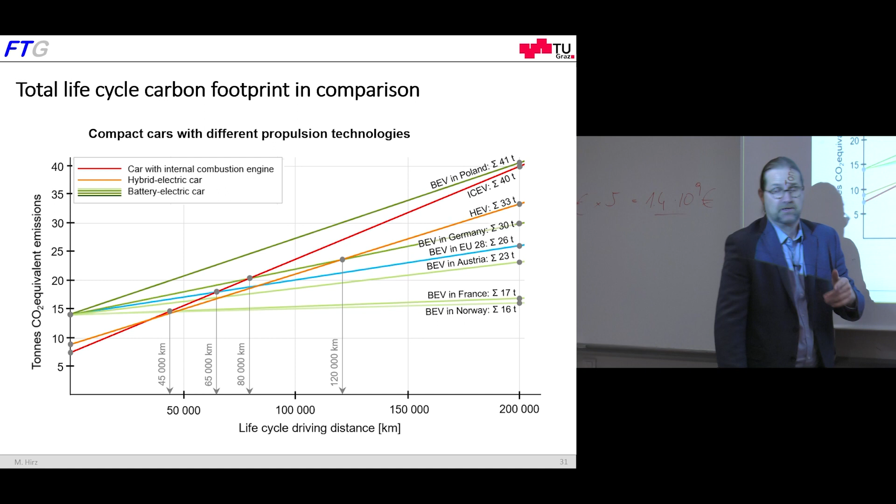Out of this consideration, we now can calculate some break-even points, just out of the diagram. So when does it pay back in consideration of CO2 emissions? The break-even to the combustion engine and the electric car in Norway is at about 45,000 kilometers, so no question here. When we go to break-even in Germany, for example, to the combustion engine, it's about 80,000 kilometers. It's reasonable. But when we look for the break-even in Germany with the hybrid car, it's 120,000 kilometers. This is too much, of course. So it's within the lifetime of the car, but it does not really take the potential of that technology.

Okay, so far to this comparison of the propulsion technologies on the aspect of CO2 emissions. Are there some questions or remarks from your side regarding this topic? Yeah, please, you and then you.

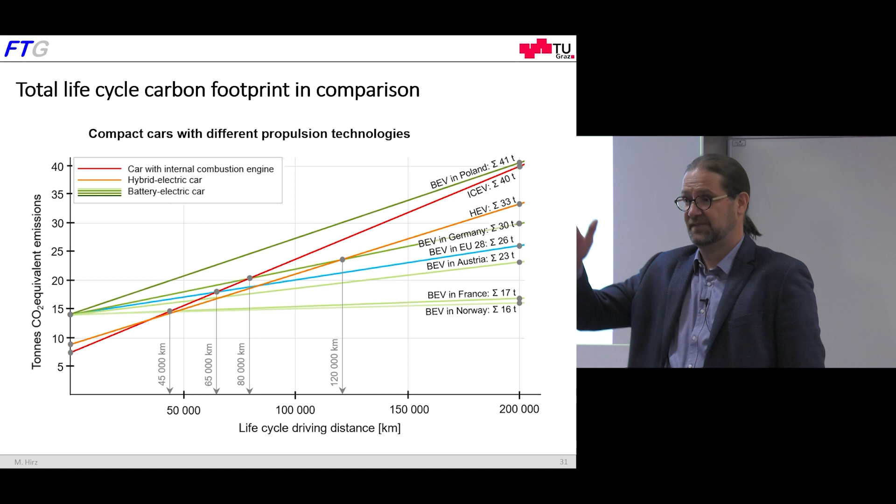Does the combustion engine with synthetic fuel have the same pollution as standard fuel? That's a very good question, I will explain synthetic fuel on the next slide. But to answer your question, the harmful exhaust emissions are about the same as with standard fuel.

The CO2 footprint is different because with synthetic fuel, the idea is to take CO2 out of the atmosphere to produce the fuel. We've reduced the CO2, then we produce the fuel, fill it in the tank, burn it in the combustion engine, and at the exhaust the CO2 comes out. So in total we have a balance. This is the idea behind synthetic fuel.

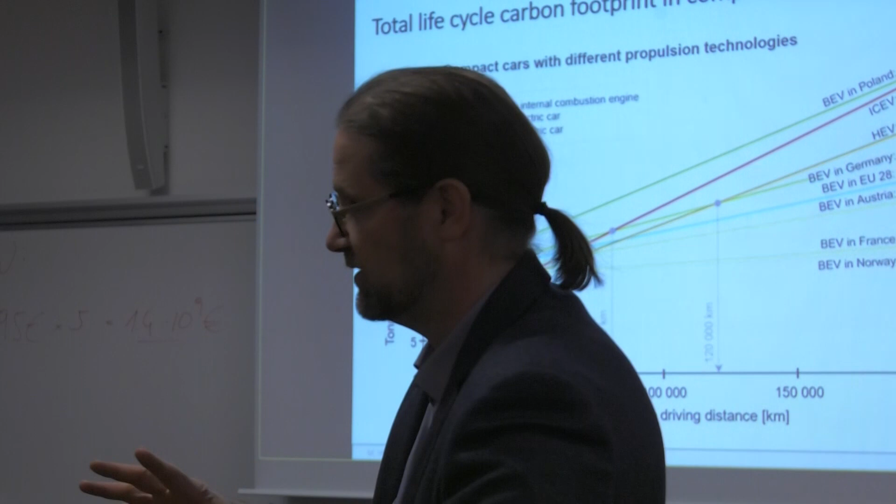But the harmful exhaust emissions are about the same, it's not much different. Thank you. Was there another question?

The line shouldn't be straight because every year the CO2 from the production of fuels and electricity changes. Yeah, absolutely right, you are correct. This is not shown here, that every year the electricity mix gets better. Over the lifetime of a car, assuming 200,000 kilometers, maybe 10 years or more, for sure the electricity mix becomes better. Thank you very much for that input. This just takes into consideration the electricity mix today. I absolutely agree, thank you.

Thank you, please, maybe just a remark: the consumption of an internal combustion engine also changes over the life of the engine, older cars consume more fuel. Yeah, and we did the same calculation for the Czech mix and the car we tested. The changing point in the Czech Republic is about 50,000 kilometers.

But for battery electric vehicles, which are efficient, not from the production side. I see, yeah, okay, it was just an example. Thank you very much. I absolutely agree, we have aging effects here.

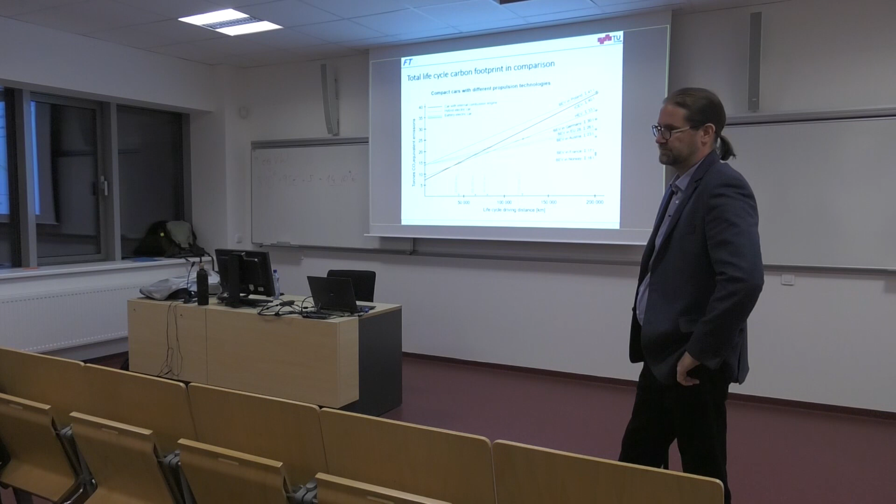Great, yes please, I have a question. The calculation of the CO2 production for the battery is computed from the raw materials, it starts from the raw materials. Would the situation change if we use recycling?

Recycling of the battery is a very important issue because of the valuable materials we have, and it works. In general there are different types of recycling: by pyrolysis, where we burn the components and extract the materials, or by chemical liquids where we take out the materials. So it works in the processes, but it does not pay back. The problem today is that batteries, especially automotive batteries, are not designed for recycling. It takes a lot of effort to disassemble the battery, extract the cells, and then scramble or recycle them. But it's a very expensive and manual work-demanding task.

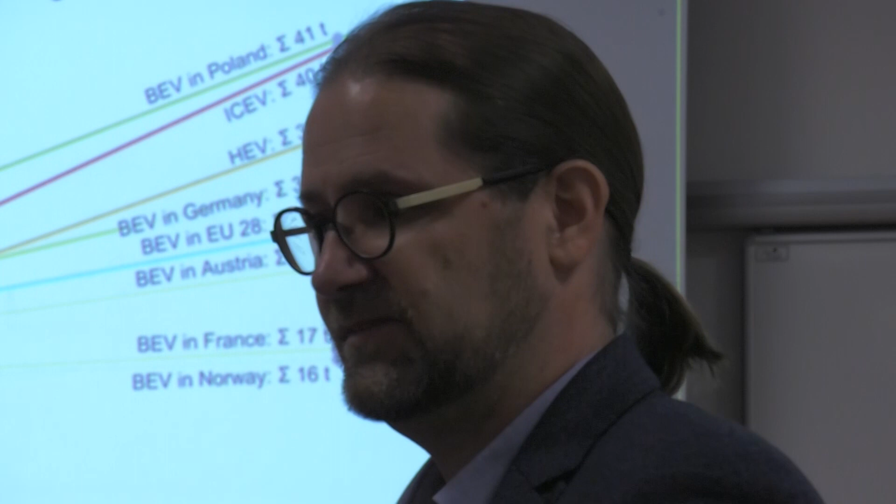This will change. In China, they have introduced legislation that for new cars, the battery must be designed for recycling. So the Chinese market is first, and we will see coming cars where manufacturers have to ensure it's possible to disassemble the battery. One example, a very bad example, is Tesla.

Tesla Model 3 is top in terms of performance, driving range, and efficiency, and Tesla is very good in terms of lightweight design, so Tesla cars are a reference for electric cars in terms of weight. But the battery is not designed for disassembling or recycling. In the latest models, Model 3 and Model Y, they even glue the cells in the battery, in some kind of thermal foam. This is very good for cooling and for stiffness of the battery and behavior of the car.

But you cannot take out the cells, so this is the challenge here. You can scramble all that stuff, but then the recycling efficiency will not be very good. So recycling is a very important topic that is not considered enough by the car industry, because at the end the materials are available and not so highly priced that recycling would pay back.

There is another approach: the so-called second life use of cells. When automotive batteries are in use after 200,000 kilometers, the battery still has capacity. We measured different cars with this mileage, and we measured between 70 and 86% capacity of the battery. That means the capacity still works.

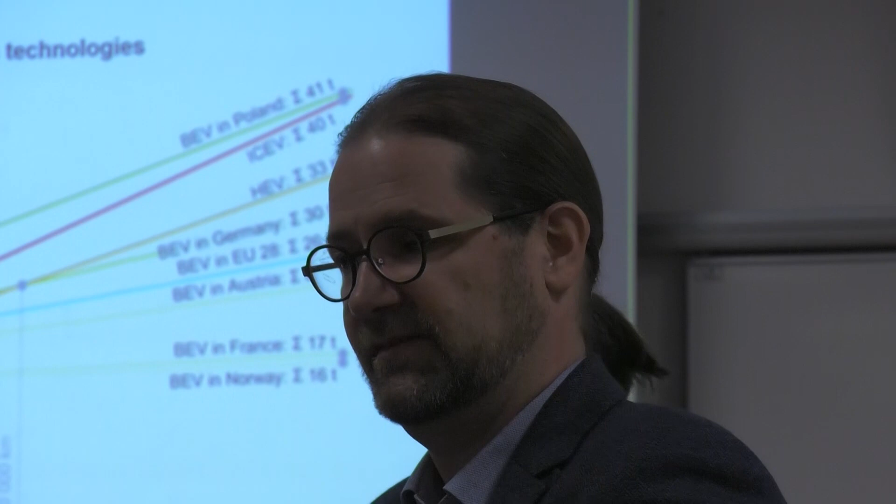One is the warranty, because when we take used cells, we have to check each of them singly to see if they work well. Because when we build this into a stationary battery in a house, in a basement, and they start to burn, it's not a good scenario. So quality management of the battery is an issue.

Then the question: who takes over responsibility if there's a problem? Is it the car manufacturer? No. Is it the battery second use company? Yes, but they have to be sure that nothing happens. And the third aspect is missing standardization.

When we get back old batteries or old cars, we have different types of cells - pouch cells, prismatic cells, cylindrical cells - with different materials inside. So there is no standardization, and the different cell types and materials have different behavior. It's not easy to combine them.

There are some projects with car manufacturers where the cells taken back are exactly the same type and material, which makes it easier, but then we have a lower volume to use for that. So with both recycling and second life, it's important and makes sense, but it's not on an industrial scale today.

I hope I could answer your question. Thank you for that. Okay, some more questions? Yeah, please.

I thank you for showing the electricity map. We with colleagues believe that this project, like electricity map, could shine a bright light over the energy mix. Thank you. You find it on the internet. You know it from the internet.

What else do we have for propulsion? In this last section, and then I come to my end - what about alternatives to electric cars? Alternative fuels. I talked about hydrogen.

And hydrogen, I have to say - when I went to school 100 years ago, I learned hydrogen is the fuel of the future. Then I went to university as a student, and I learned hydrogen is the fuel of the future. And today, I tell my students, listen, hydrogen is the fuel of the future. You see the joke of the story - hydrogen has been the fuel of the future for decades.

Why is it so attractive? It's the possibility to drive a cyclic process. The idea is we produce hydrogen by electrolytic conversion out of water, we store it, and then we can use it in a combustion engine or fuel cells to produce electricity or mechanical energy. What comes out is water that we can reuse for producing hydrogen. So far the theory.

What about reality? Perhaps the largest problem today is that most hydrogen is produced out of natural gas. The main fraction of natural gas is methane - CH4. Methane is a main fraction of natural gas, and it's very attractive for producing hydrogen since we have one carbon and 4 atoms of hydrogen.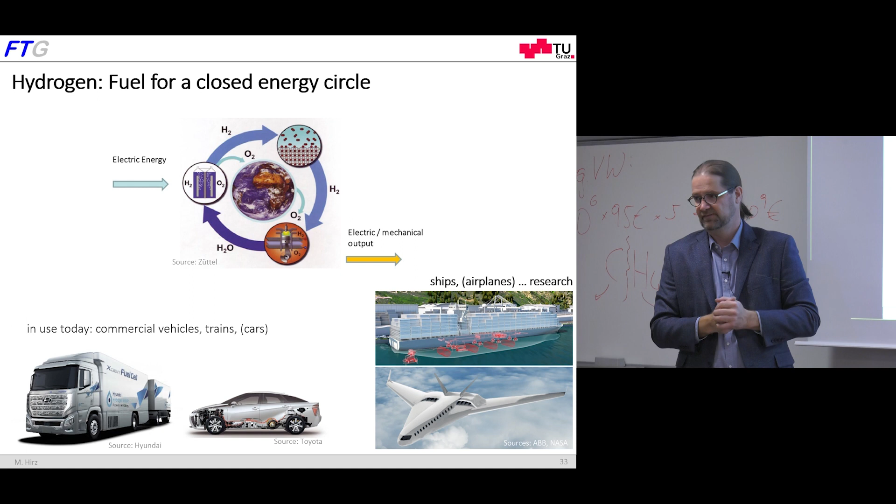They also operate bus fleets in China. And in Europe too, there are hydrogen projects. For example, my city will buy next year 2 hydrogen buses, and we will learn how they operate in public traffic. So the technology is here, more or less, but it's relatively expensive, and the production of hydrogen is an issue.

Perhaps you know where the largest share of biomass is applied for fuel production? Does somebody know? Brazil, yeah. They produce it out of sugarcane with a very high efficiency, this ethanol to drive the car, and it works perfect. The CO2 footprint is relatively low. In Brazil, they have the advantage of 2 harvesting periods of sugarcane a year, so it's very effective. But on the other hand, there are some social issues with the native population and burning rainforest. I'm not so sure if this is directly related to the sugarcane plants, but they have some other issues with this.

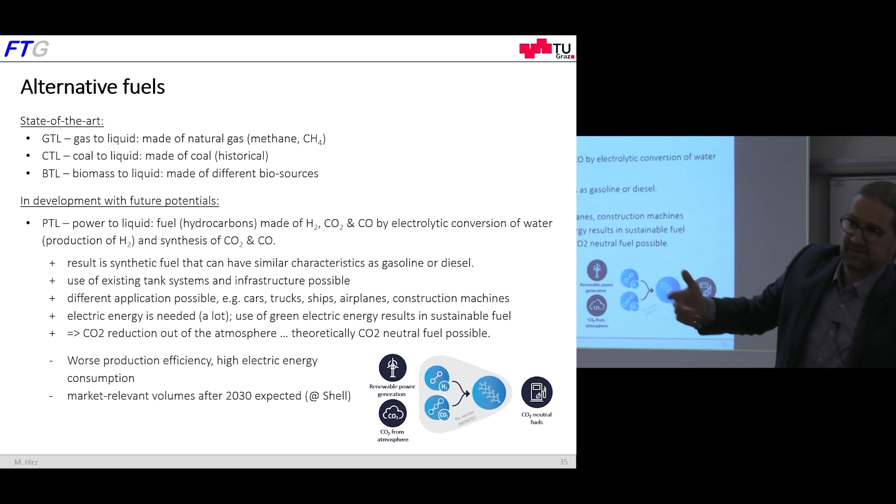So e-fuels can be a part of an energy system where they can be used for storage of energy. Because in sustainable, sun-based power plants or wind power plants, we have high fluctuations. When we have a storm in the North Sea, they produce so much power that energy prices drop down even to minus in Europe. And then when there is no wind, they don't produce power. And with the sun it's the same. When we have weather as today, the photovoltaic system will not produce a lot of power. When the sun is shining, yes. So we have these high fluctuations, and therefore we are looking for energy storage, and both hydrogen and e-fuels can serve here.

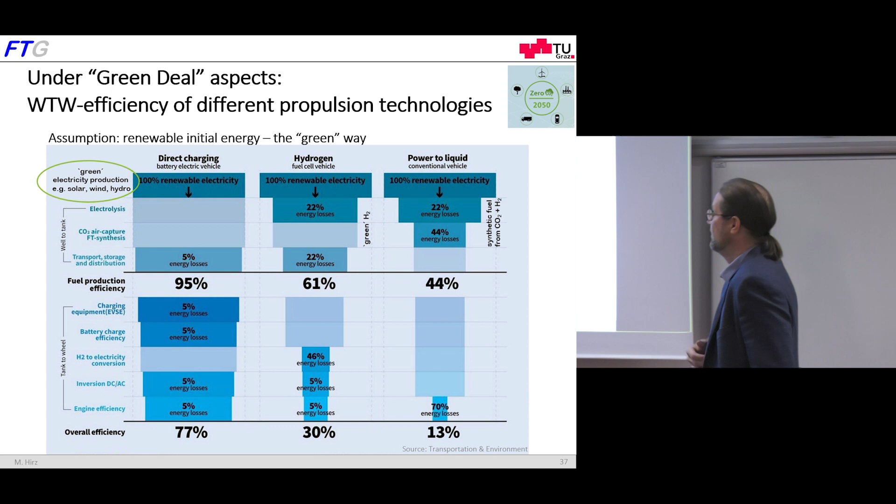I would like to give you a comparison of, let's say, a future scenario where we consider the Green Deal. So here I have 3 cars with different propulsion systems, and all of them are CO2 neutral. It's the vision of the Green Deal. For that we need CO2 neutral electricity production, so we have electricity from wind power, solar power, hydropower. In the first example, we use it in an electric car by direct charging. In the second example, we produce hydrogen with green electricity and drive a hydrogen car. In the third example, we produce the e-fuel, the CO2 neutral fuel, by use of green electricity, and then we burn it in a combustion engine.

This comparison is related to efficiency, so to the losses of the process. When we look at the electric car, we have renewable energy, and this is from a publication from Transportation and Environment - the numbers might be a little biased, but it's about the range in general. They assume 5% energy losses, so 95% efficiency, at the charging station for the electric car. Then we have the charging losses - only 5% losses here, since we do low power charging in this example.

Then the battery losses about 5%. And when we drive the car, we have assumed very good efficiency - 5% and 5% losses only in the electric drive, so smooth driving. This would result in about 77% efficiency. We have calculated in my department that depending on the different aspects we consider, like fast charging or worse efficiency in the electric motor, we reach a range between 65 and 75%. So in this range is our electric car.

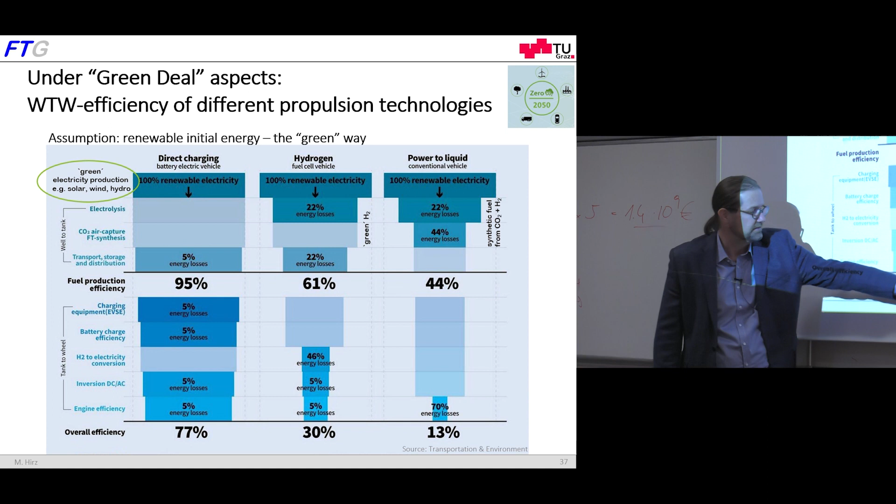The hydrogen-driven car - here we need to produce the hydrogen out of electricity, and we have about 80%, 78% efficiency with a high-quality electrolytic system. With high temperature electrolysis, we can reach nearly 80% efficiency. So we have 22% losses for the production of hydrogen. Then we have the storage and transport of hydrogen, with compression to 700 bars or more, and the transport. This is calculated here again with about 20% losses, so that in total we have 60% at the hydrogen gas station - this is the well-to-tank percentage. In the car, we have the fuel cell assumed with about 54% efficiency, the electric motor and inverter, so that in total we come to about 30% efficiency of the hydrogen electric car, which is about half of the electric car.

At the end, when we look at the e-fuel, we have the production of hydrogen - we need the hydrogen for the e-fuel. And then we have this synthesis process of CO2 and hydrogen, which is very energy demanding, so that the well-to-tank is about 44%. These are the losses for the production of the e-fuel. In the car, it's simple - we have a combustion engine. In that example, we burn it with about 30% efficiency of the combustion engine on average, so 70% losses, and we have about 13, perhaps 15% total efficiency, which is about a quarter of that of the electric car.

What does this mean at the end? Operation of a hydrogen car will be minimum double the expense of operation of an electric car, and operation of a combustion engine car with e-fuels will be about 4 times more expensive than an electric car, because the efficiency at the end represents the costs of that. Not considered here is energy storage, as I mentioned. So it might make sense to have hydrogen production, to have e-fuels, to store the energy of this high fluctuation of sustainable energy generation.

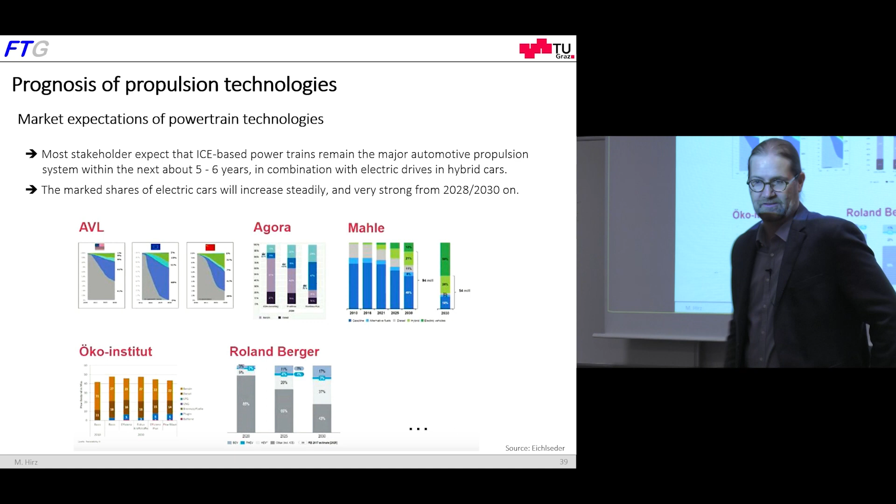Okay, now I come nearly to the end of my presentation. I just want to give an outlook and summarize a little bit the market situation for the next years. So when you go into newspapers or journals or even scientific publications, everybody looks into the crystal ball and calculates which cars will be sold, which technology will win. I have just summarized here a number of prognoses, and two things can be said.

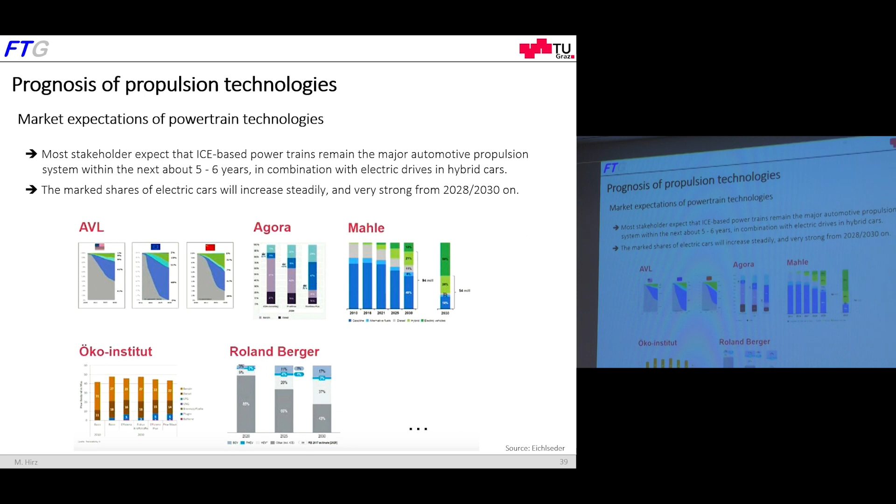The one is that combustion engine-based powertrains will be very relevant for the next about 5 years. But after 5 years, so it's about 2028, the production of combustion engines will decrease because the car manufacturers have to reach this 2035 target with the ban of combustion engines. And when we consider the development time of new cars, it's about 5 years. So it's to be expected that from 2028 on, nearly no car manufacturer will really introduce new cars with combustion engines anymore because they fade out over time.

From 2028 on, electric cars will have the main share of new car sales on the market, especially in Europe. For Europe and China, I would see it in that way. For United States, it might be a little bit delayed, also different in different states, but it might be a little bit delayed.

Another aspect I want to mention here is that we have to distinguish between the numbers of new cars sold and registered, and the existing fleet. I'm not so sure about Czech Republic, but in Austria we have about 5 million cars on the roads, old cars, new cars, whatever. I guess Czech Republic is similar, about 6 million, 6.5 million cars registered on the road.

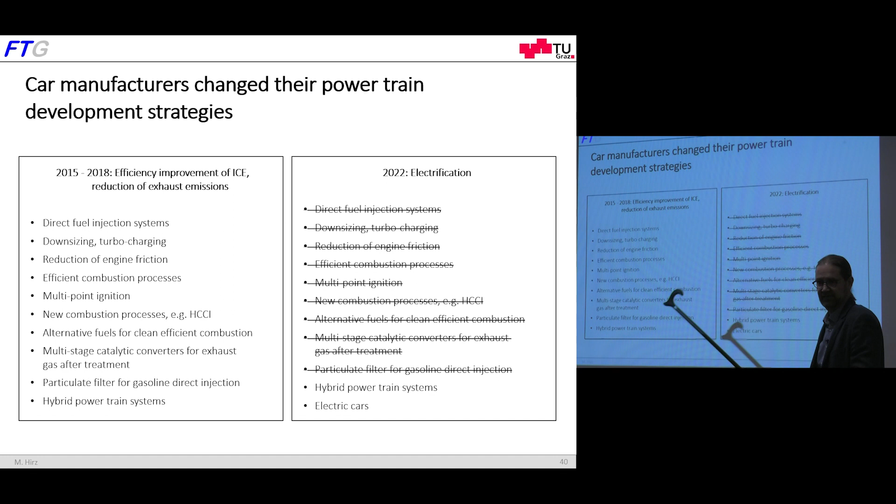In this time, the development was done in combustion engine improvement: fuel injection system, reduction of friction, improvement of emissions, new combustion processes, alternative fuels, also hybrid powertrains, and a little bit of electrification. When you analyze the publications and research projects in the automotive industry in 2022, everything has stopped that had to do with combustion engines.

Not in Czech Republic, okay? You are the last bastion here? Okay, that's good to hear.

But at the end, I see it in my university. We have an institute that is the largest university institute in Austria. It's the former Institute for Internal Combustion Engines. There are about 150 people working in this one institute only, and they changed the name last year to the Institute of Sustainable Drive Systems. Because they have no new projects in relation with combustion engines.

And also when we talk with the car industry, where does the money go? They don't develop new combustion engines, except Czech Republic, because they have to invest into electrification. Perhaps you did read about that - car manufacturers announced, Audi for example, that they will develop their last generation of combustion engine. I think it will come into market in 2025 or 2026, and then they will not further develop combustion engines. So the car manufacturers published this, with the exception of some markets, United States, China. Because in China there will be no ban of combustion engines. In China it's very different - they have very strict regulations in the cities, but beside the cities, they will further allow the combustion engines. China does not ban combustion engines.

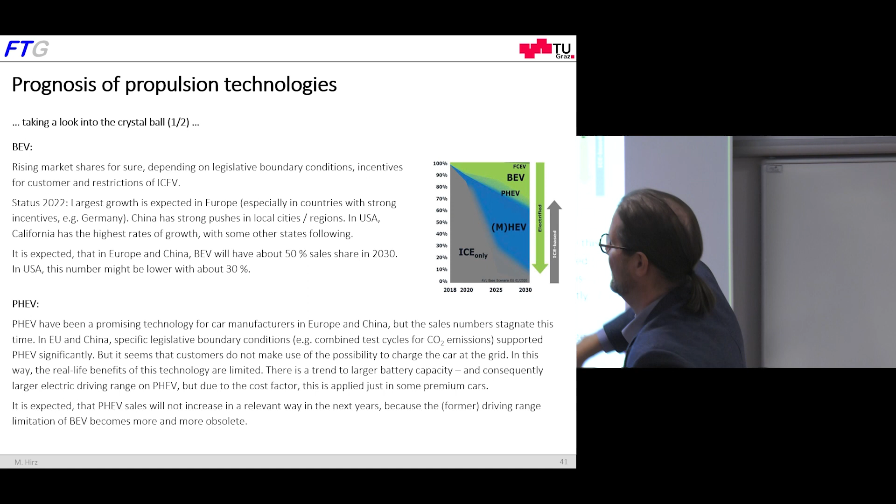Okay, here's some prognosis, I will not go into detail. Looking into the crystal ball, electric cars will have a market share of 50% or more on the Chinese market and on the European market. All calculations point to that. United States a little bit delayed, perhaps 30%, 35%.

Plug-in hybrids - with the plug-in hybrids it's a story. They were very popular at the car manufacturer because it was a possibility to sell their cars and to have low emissions in the test cycle. Because for the plug-in hybrids, there's a specific test cycle defined which considers the purely electric drive. That was the reason why plug-in hybrids have a fuel consumption in the test cycle of 1.9 liters, whatever, and then you test it on the road and you have 6 or 7 liters. But it's not wrong, it's just a consideration that you can plug in and drive purely electric. But at the end, it turned out that the customer doesn't care and doesn't plug in.

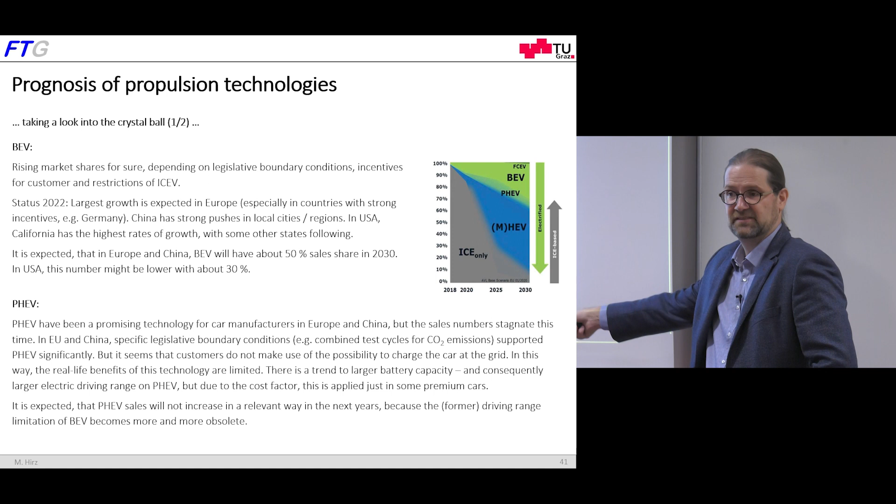And therefore the legislation will consider that in two ways. The one is that plug-in hybrids need larger batteries, so more electric driving range. And on the other hand, it's also discussed to modify the test cycle to be more reality-near with the fuel consumption. And perhaps the largest competitor of the plug-in hybrids is the new electric cars with the larger battery, with the better driving range. So it's not necessary to have a combustion engine on board because the driving range is 400 kilometers or even more, and the prices are not so much different. Therefore, I see not a large growth in the plug-in hybrids business.

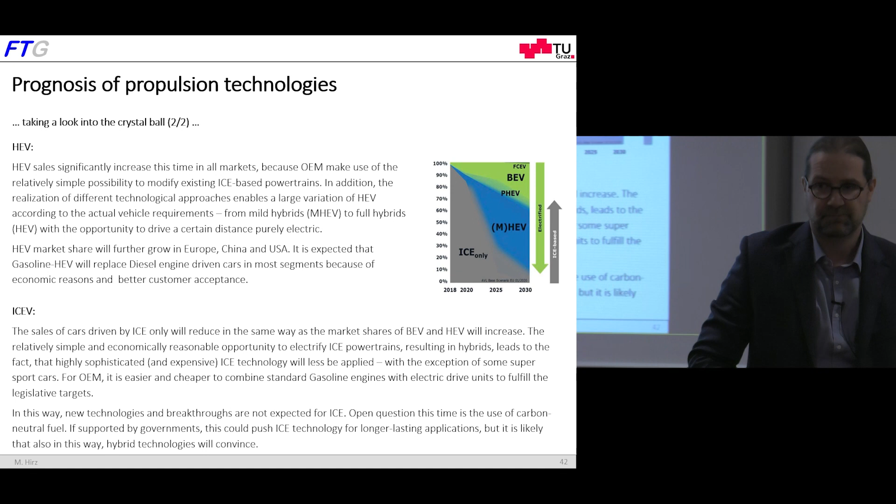Hybrid electric vehicles, yeah, hybrids we will see. Because with the hybrids, the car manufacturer can very simply and easily, with low investment, reduce the fuel consumption of the combustion engine. So more or less all combustion engines will be somehow combined with electric drive - is it a mild hybrid or full hybrid? Because at the end, it's necessary to reach the emission targets. And in my opinion, the largest competitor to the diesel engine is the hybrid. It's cheaper, it's very simple to combine a standard gasoline engine with an electric motor. You have the same fuel consumption as a diesel, but it's cheaper. It's more simple - you don't need this exhaust gas after-treatment with the 3-stage conversion and so on.

And the combustion engine vehicles, so cars with only combustion engines, will decrease in the market. So I would say from 2027, 2028 on, we will have nearly no combustion engines without combination to hybrids. It's different for other markets, but for Europe, nearly all cars will be equipped with electric drive in terms of hybrids or purely electric cars.

Okay, with this I thank you for your attention. I'm here for discussion, of course. It was a pleasure for me to be with you here, and I hope I could show you some things and awake the interest and enthusiasm to the change, to the propulsion technology, to the change in automotive industry. Thank you very much.

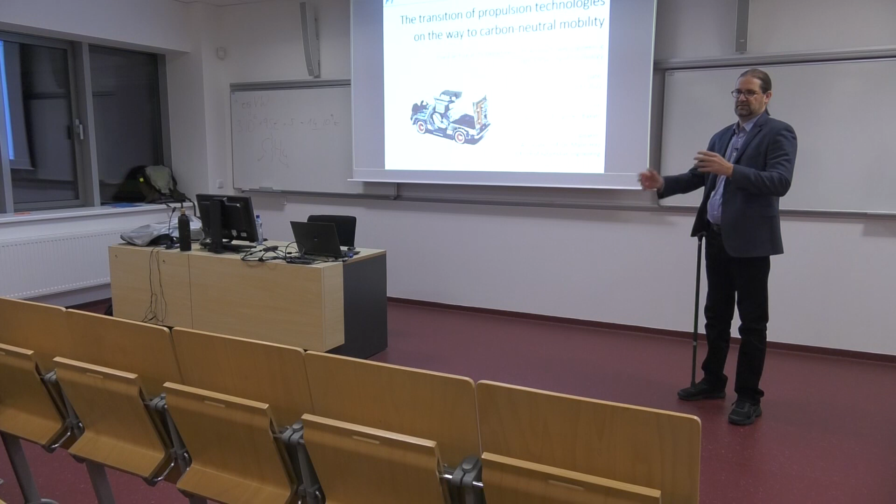Yeah, I've been going to China frequently for 20 years. I worked there as a professor at the university, and we had many projects with Chinese companies. Regarding the Chinese situation, we have to consider that the Chinese economy system works differently than ours—it is planned by the government.

The government set the plan that it supports the development and production of electric cars in China. That's the reason why we have really strong companies there. We talked about CATL, the largest automotive battery manufacturer. We also have BYD, with many production facilities. This is because of money from the state, from the government, to start this up, and here we talk about billions, so it's not small money.

The same is true with car manufacturers. One example is NIO. Perhaps you have heard about it. It's a Chinese car manufacturer I've had in my eyes for about 6 or 7 years. It's a startup company and they produce pretty good electric cars. They got a lot of funding from the Chinese government to reach that status, and now they're coming to Europe. Last year they came to Norway, and this year to Germany, and they want to sell cars in Europe. I'm not sure if they will be successful in Europe, but they are here.

Perhaps more critical will be manufacturers with lower cost cars - electric cars for 20,000 euros with the quality of a Volkswagen ID.3 will be a competitor. On the Chinese market there are already such cars, perhaps not as good quality as a Volkswagen, but they work on that. And they are not stupid - they hire European engineers to develop their cars, and this could be a point of serious competition here.

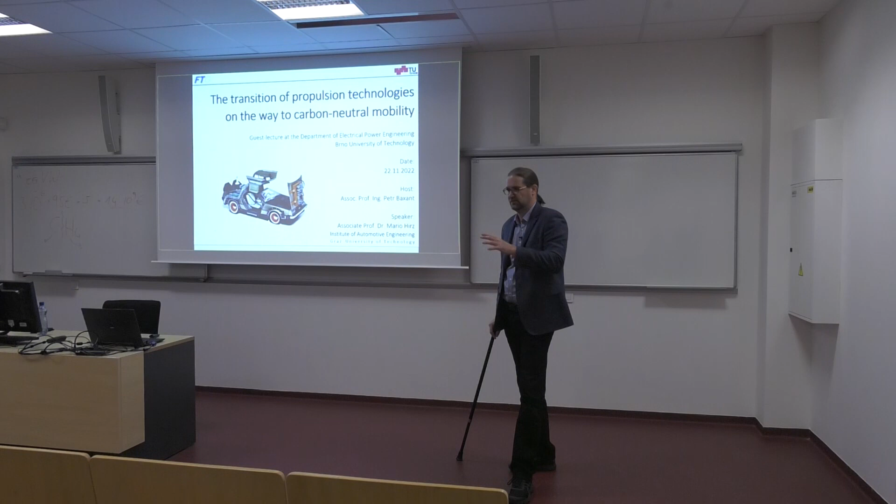And they are smart. For example, Volvo is owned by a Chinese company. They buy or take shares in European companies, they go into joint ventures. And MG, yeah, disappeared - it's a Chinese company now. We will see, yeah.

Thank you for the question.

Okay, no more questions? Well, as we were talking about Chinese cars - what do you think about Chinese manufacturers pursuing LFP batteries in EVs?

The LFP batteries, lithium iron phosphate, are in Teslas today - the Teslas that are sold here. Because they are Chinese - produced in Shanghai and exported to Austria. I did read a publication that about 50% of all Teslas sold this year are equipped with LFP batteries. So they are here.

We have a problem that other car manufacturers did not react on this LFP early enough. Now every Volkswagen, Mercedes, BMW announce they will also produce LFP because it's cheaper, it's more safe, and it has a longer lifetime. It has a disadvantage of less energy density, but for a middle-priced or low-priced car, it will come. So I see LFP as the strongest increase in battery technology.